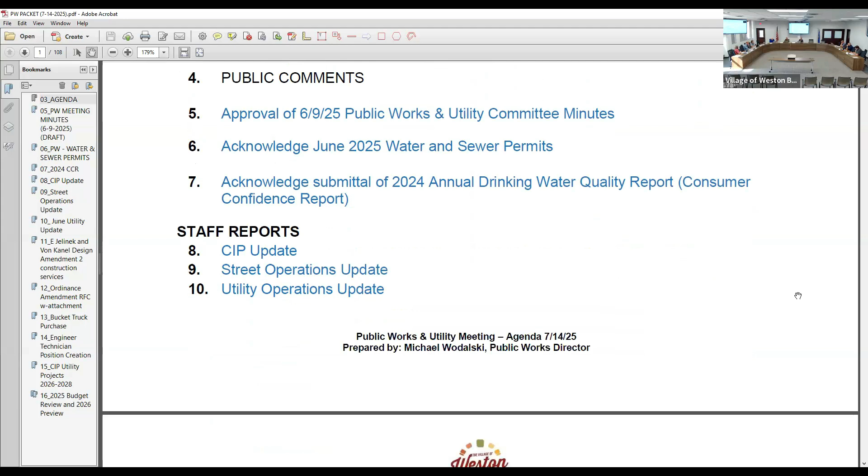Item 5, approval of the 6/9/25 Public Work and Utility Committee meeting minutes. Move to approve. Second. Discussion? All in favor signify by saying aye. Aye. Opposed? I have it, thank you.

Item 6, acknowledge June 2025 water and sewer permits. Move to acknowledge. Second. Discussion? All in favor signify by saying aye. Aye.

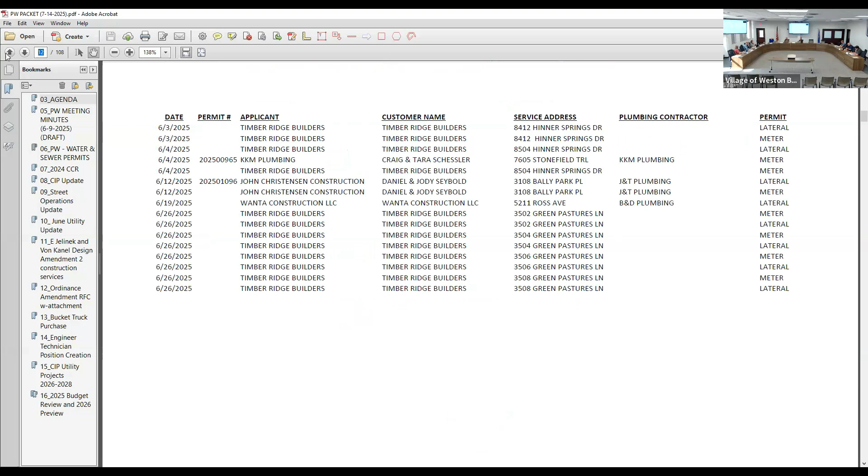Item 7, acknowledge submittal of the 2024 annual drinking water quality report, the consumer confidence report. Move to acknowledge. Second. Discussion? All in favor signify by saying aye. Aye. Opposed? I have it, thank you.

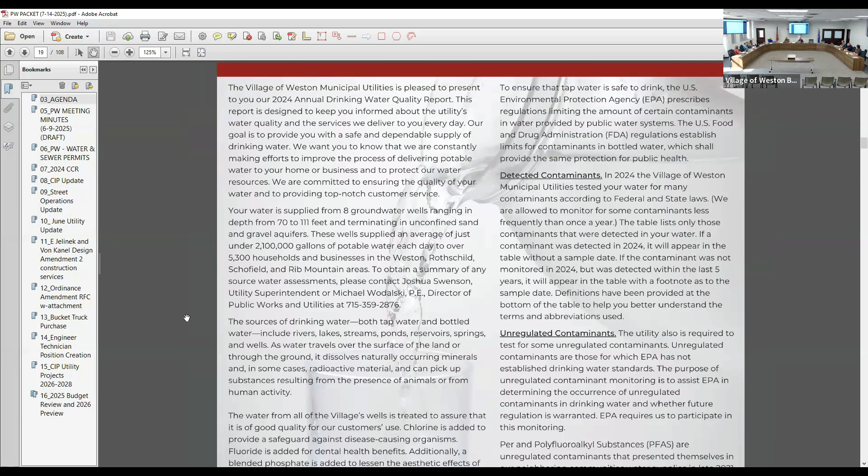Do you want Josh to go through that at all? I looked at it at length and there's a lot of detail there that I really appreciate. For me, the important thing is that anybody who really wants to review our drinking water situation here in the village has enough information to do that.

I've got calls actually asking for explanations on stuff. A lot of it is generated through the DNR, but we add a little spice on our own water report there. Well, that was what I was concerned about — you put enough information out there, it'll start all kinds of conversations. There is that too.

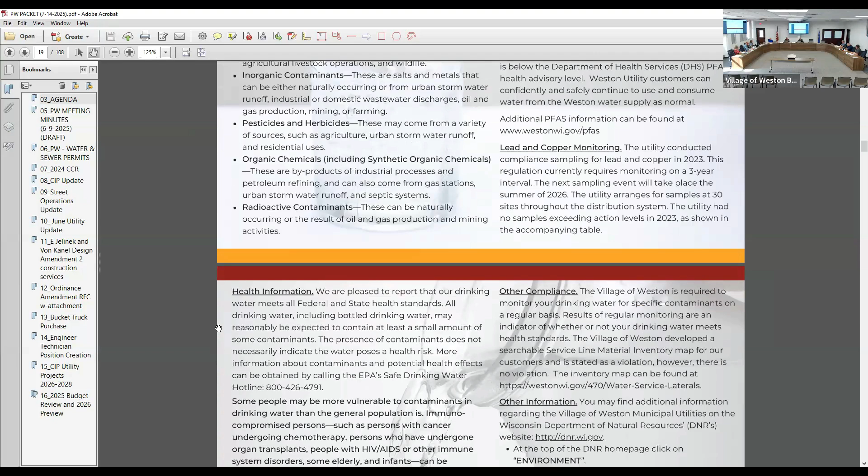We did get our unregulated contaminant monitoring rule 5 results, but didn't get them in time to include in this report, so that could add a little more confusion, but that'll be in next year's report. We tried to give an overview of how they can find more information on what we actually sample and what our results are, so if they want to get into the nitty-gritty, they certainly can.

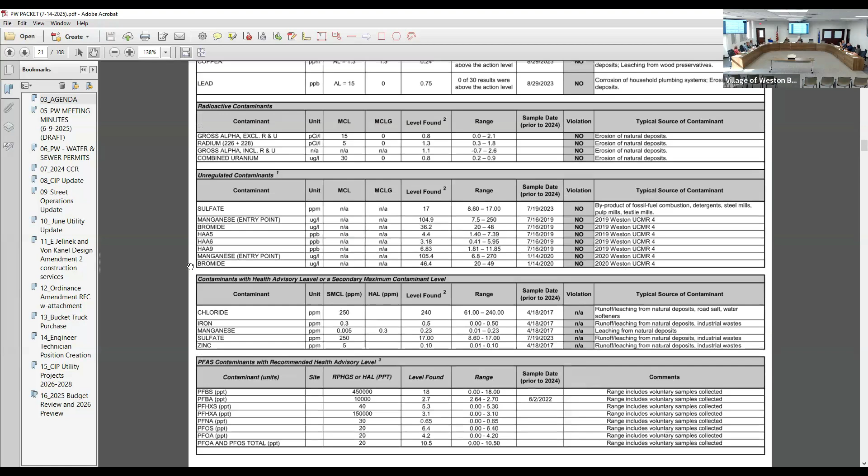Yeah, I guess the only other thing is this was our first report that included wells 7 and 8. Now we have 8 wells in our system — 7 in our main distribution system and 1 over in Cary.

So is the DNR going to review this, or will they put it on the pile for whenever they get around to taking a look at it? We have to check the boxes — the page you're seeing right now is everything we do for compliance sampling, which gets dumped into their database. That's spit out once I put in our meeting dates and where people can find information, but it's really just a cookie cutter generated thing.

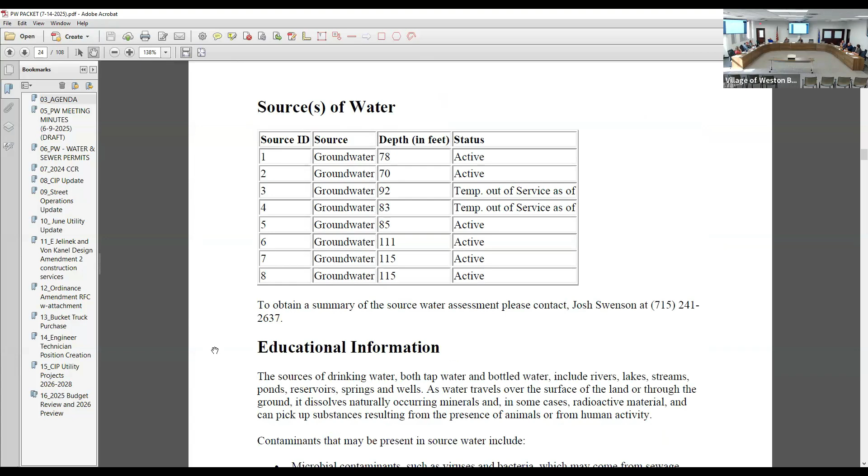Like Rothschild, I think they literally just use this as their annual report, but we put a little extra stuff detailing what's in our system — miles of main and some other things more specific to our system.

I don't necessarily like how it handles the sample date — if there's no sample date listed, it was sampled this year; if there's a sample date in there, it was sampled prior to last year. That's the DNR's way, so that's kind of what we have to work with.

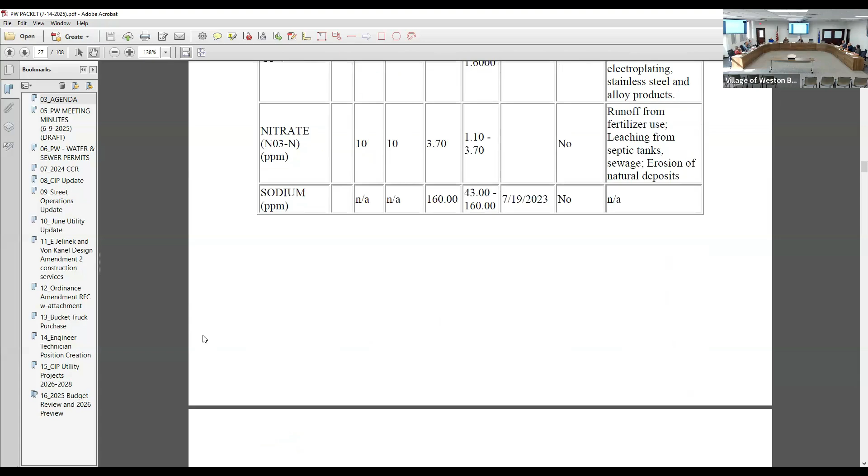The biggest thing, I guess, from the DNR's perspective is the MCL, the maximum contaminant level. As you look through it, our range or level found is less than the contaminant level. So as far as the DNR is concerned, we're under the contaminant level — good job. If we had a bunch of items well above that level, we'd probably start having more interaction with them.

I had just one question. Did they just give you a violation by mistake? Is that what that report was? I've reached out and I was actually meant to bring that up too. So it was turned in, are you talking about the material inventory analysis?

So our service line material database, when we had submitted it, apparently there was a delay in them communicating to us that there were a few that I had labeled as unknown on the customer side for their service. So I had to go in there and change what the material type was, and then it was fine, but it didn't reflect that in there.

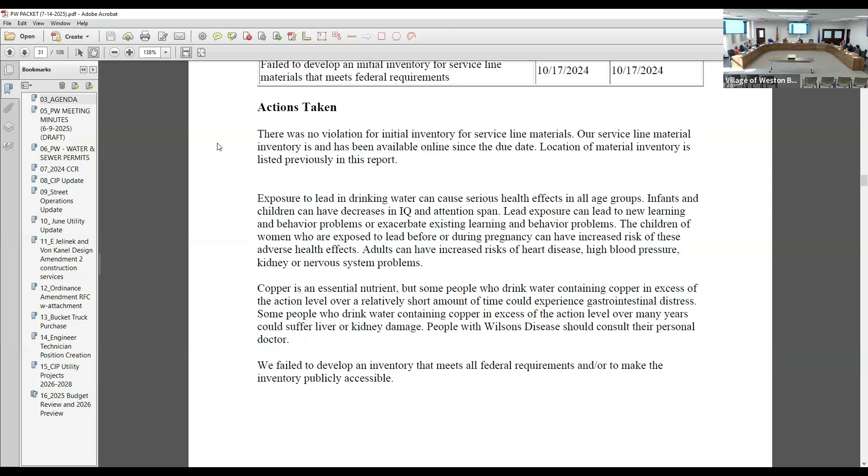So I reached out to make sure that everything is copacetic. I haven't heard back from them yet, but everything is submitted, it's online. I got confirmation that they received and it was approved until I saw that in here when I populated the report, where it showed that there was a violation. So it is online.

The service line inventory is something we've got to work through every year. We probably have to revisit it and make sure what's added, new homes that we add, we've got to add that to our inventory. So I'm sure there are some mistakes in there, we mislabeled a couple things, but it's something we'll have to keep working through.

If we dig up a service and find out it was something different... I mean, we do not have any lead services. That's the biggest impetus of this material service line database, for all the lead service line replacements to be noted, which we have none.

But yeah, just having the violation date and the resolved date as the same day was confusing. I can't remove that out of there, but yes, I was confused by it. I'm like, how do you get that and resolve it the same day?

I worked a lot with DNR in the past, and they just told me flatly, if you think we're gonna give you a clean bill of health when you submit the report, that's not gonna happen. Find something, we're gonna ask for it. So you do a great job and submit it, but still they're gonna come back and... never perfect.

So these reports, what, every 2 years? Every year? So this report is created for last year's sample results and everything that we did in 2024. So you don't redo everything practically, you just review and update it.

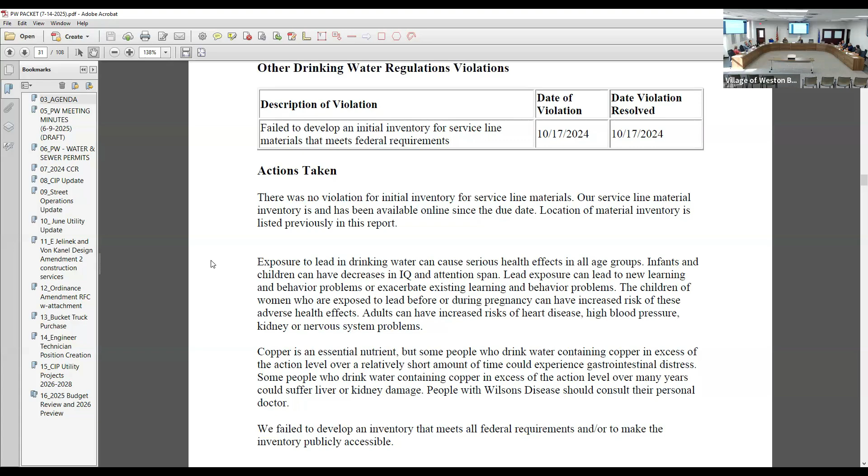Yeah, a lot of the front end stuff we update, like our lane miles, our number of wells, some of the stuff that changes for us as the Village of Weston. But a lot of the information under our inorganics or our disinfection byproducts is kind of cookie cutter, boilerplate material for what we do that year for sampling. It automatically updates in the DNR system and is generated through their online system.

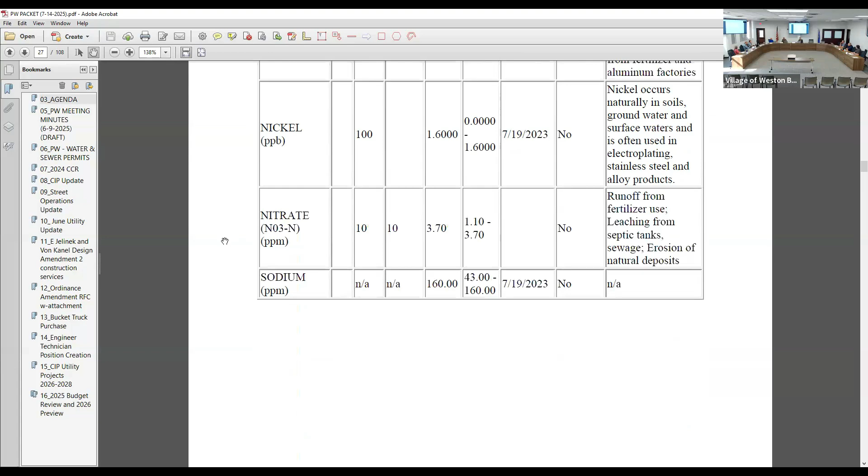Okay. Other question? I'm good. You're good? Okay.

Staff reports, CIP update. Weston Ave is still chugging along. The pipe crew should be back this week. Blasting is finished, so I'll be moving through that and getting the roadway built or rebuilt between Von Kanel and Heeren.

They are encountering, I don't think it's quite peat, but almost like a hidden topsoil layer about 1.5 to 2 feet below where the existing road bed was. So spending some time getting that material out of there and putting back suitable material.

It's not uncommon for us in older parts of the village that never had water and sewer before, as we start digging, to find that back in the day they just maybe dug out some of the ditch, put it in the middle, and covered it with gravel and called it a road. So catching pockets of that, it's not necessarily consistent throughout, but there are pockets slowing down the road building a little bit on that portion.

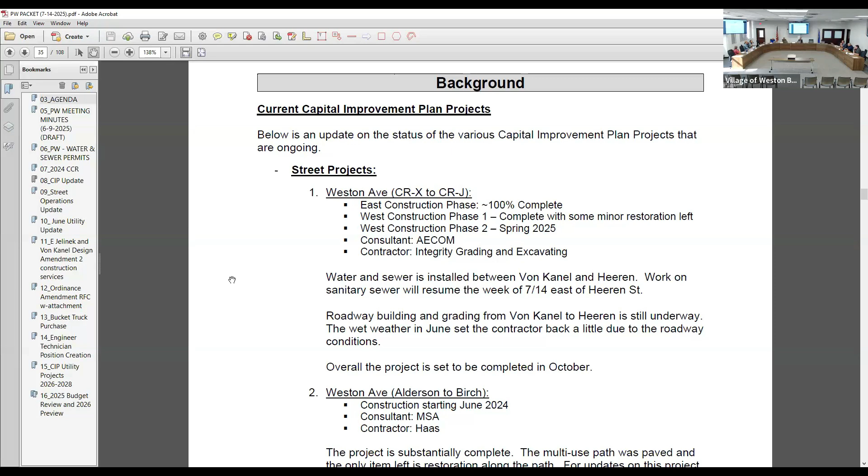The Alderson to Birch part of Weston Ave, the multi-use path was paved. That was 2 weeks ago now.

Excuse me, Michael, what did they do with the blasted material? It's still in the ground, they haven't excavated it out yet. So what's the plan?

If it's usable, for the most part, they're just going to dig it out and put trench backfill back in. With the rock? Well, they'll remove whatever rock is in there and then put new material in.

Yeah, we don't want rock at the top of those pipes. So if they say they blasted the 10-foot trench, anything in that 10-foot column will be coming out. So where he's disposing it, that's what I was getting at. It's up to them to...

Yeah, I mean, if it's something we think we could use and get crushed with our base course in the future, or if it's something that'd be usable for riprap or something, we could keep it. But if it's not something we'd want to use, just like any other spoils on the project, it's up to the contractor to dispose of.

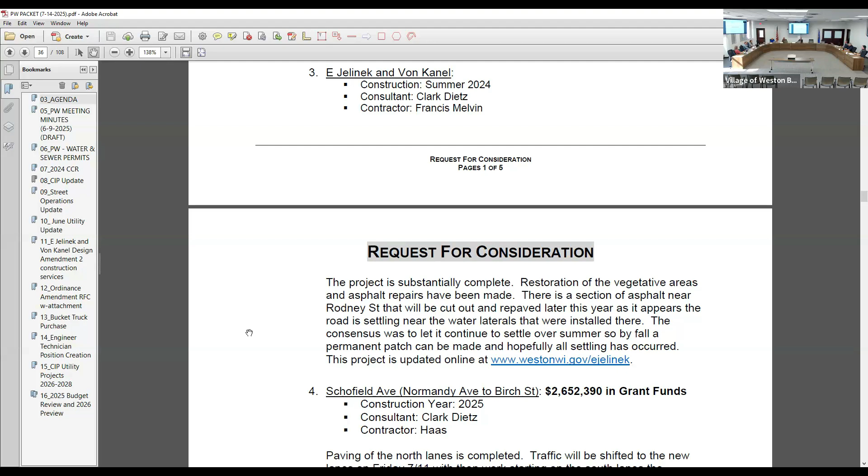I think the last 2 hydrant adjustments were done Friday. I saw them out there taking care of those. And there's maybe 1 or 2 driveways kind of on the punch list to follow up on, but for the most part, again, that one's done.

Schofield Ave, if you've driven through there, we're now driving on the asphalt lanes on the north side, and they start breaking up the concrete on the south side. So kind of a repeat of phase 1 is now happening in this second section.

Fuller Street's the other one that's currently underway. So storm sewer and water main valve and hydrant replacements and adjustments are going on north of Rogan Lane. Today they're at Tricia, tomorrow they'll be at the Morning View intersection. I think they're hopping back to Thomas and then maybe Ross Avenue later in the week. And I think that kind of completes the intersections along that stretch.

And once that utility work is out of the way, they can start building the roadway. While they're doing that with that crew, they have a second crew out at Kellyland Park digging the storm pond. If you've driven by there lately, it's a really big deep hole. And all that sand is currently coming to our Ryan Street site so we can use it on future projects.

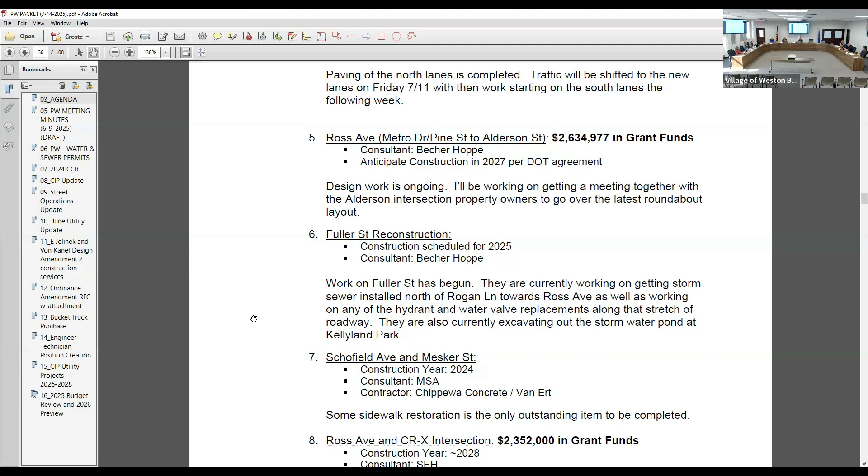And those are the main ones undergoing. We did have kind of a touch base meeting with RC Pavers for the business park and hospital area repaving for this year, making sure they get that work started here in a timely fashion so that it can all get paved before the snow flies this year.

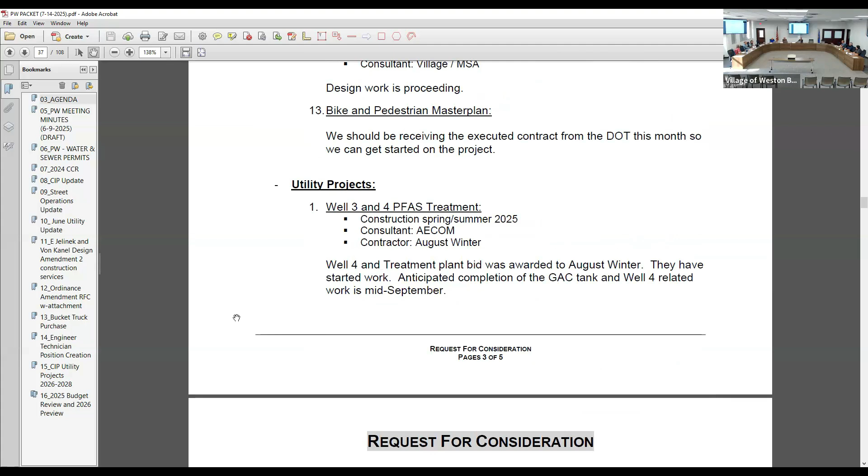We're still getting through design on some of these other projects and coordinating some items with the DOT at the various levels. And then the well 4 project, the GAC tanks now are looking like they'll be delivered the first week of August, and should get that whole area back up and running, hopefully by mid-September, pumping well 4 water back to the system. And then well 3 was submitted for the emerging contaminant safe drinking water loan at the end of June for the next funding cycle.

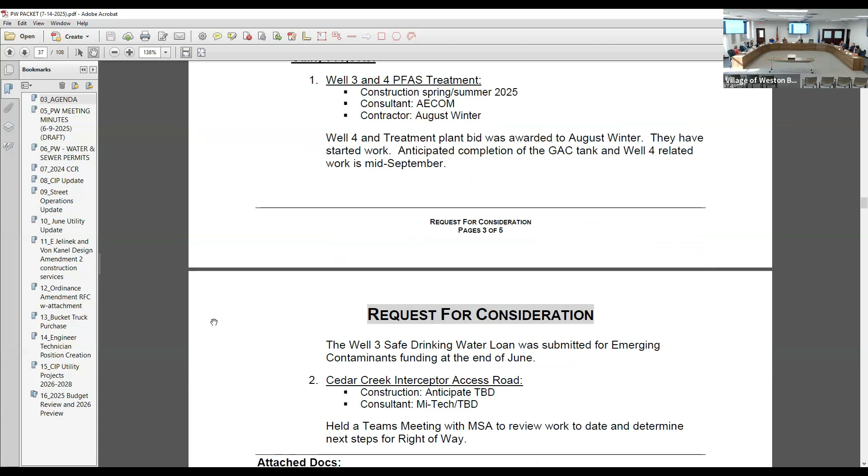And we did have a meeting with MSA to go over the Cedar Creek Interceptor Road. So they're looking at the easement exhibits and kind of evaluating the scope that they should be providing us a contract for.

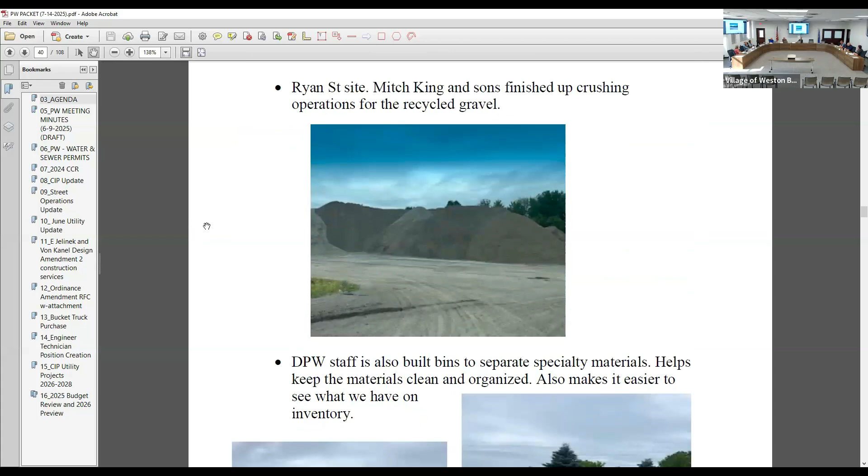Item 9 is street operation update. We've got the rural ditch mowing and the right of way mowing still in progress. The summer help and mechanics helper are helping with those operations. Also, Mitch King and Sons finally finished up crushing in June, and all the recycled gravel is ready to go. At the Ryan Street site, we built material bins that help separate the specialty materials we get, which helps keep it a lot more organized and clean.

Norcon Company did the repairs to the Eau Claire River Bridge in a matter of 2 days, completed Wednesday into Thursday, with minimal traffic impact. The cost was about $9,500.

The area repaired wasn't just the big square shown. There were multiple spots on both lanes, little ones upstream and on the other side as well, but the focus here is on the big patch.

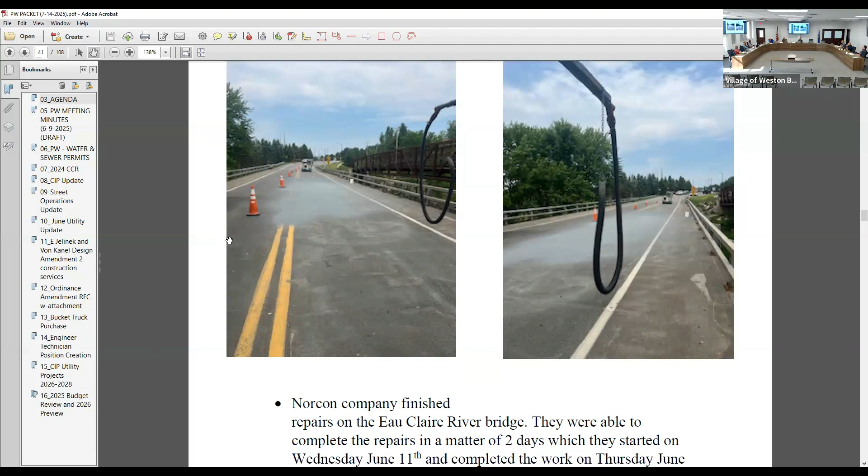Regarding the other bid, Michael, I thought there were three. On that one we just had the one at $9,000, but there was another one higher, I think.

On the topic of the bridge, what is its remaining life? From sound checks it's sounding more hollow each time, so these repairs are likely going to be more frequent. We repaired it 4 years ago, and it's not going to get any better once it starts going. I think the last fix around 2020-2021 was maybe a 10-year fix.

In our budget items, are we starting to look ahead on that bridge? Yeah, that'll be a bridge probably in the 5 to 10-year range. Really hoping there'd be another river crossing at some point, but figuring out how to do that isn't an easy answer.

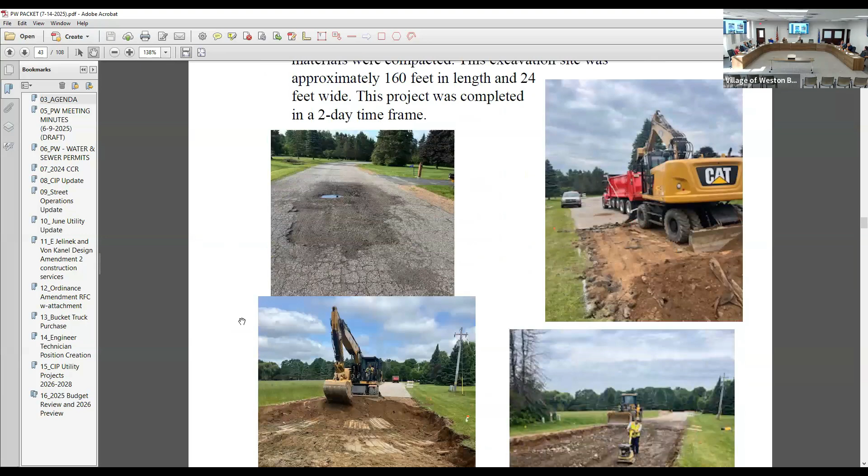On the road construction side, staff excavated one of the bad spots on Bushka Street, performing a 2-foot excavation of material consisting of topsoil and clay, similar to what Michael mentioned earlier on West Neck where the ditches had rolled into the roadway. They dug out to a good bedding, replaced it with a foot of break rock and 12 inches of gravel. All material was compacted back at the site, which was approximately 160 feet in length, 24 feet wide, completed in 2 days.

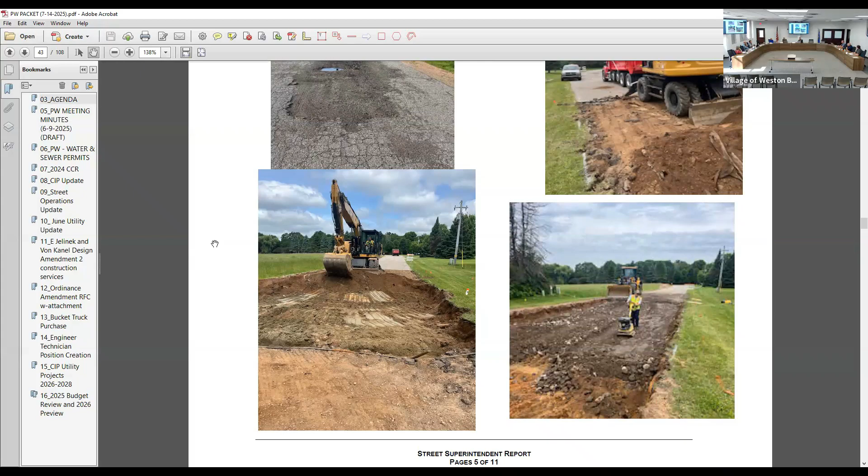Was there a base course in there? Minimal - it was granite as the base, since the whole subdivision was built like that. That's why the road doesn't hold up; we're going to have to keep doing more sections, probably yearly, to get that road built to a proper standard.

We also did the concrete work on Alderson, 6409, where a water main break had taken place over the winter.

Crew poured back the sidewalk, driveway, apron, and curb line, also did the topsoil and restoration of blacktop. Between the 2 sites along Alderson Street, there occurred over 60 feet of curb, 25 feet of sidewalk, and 10 feet of driveway apron concrete, totaling just under 6 yards.

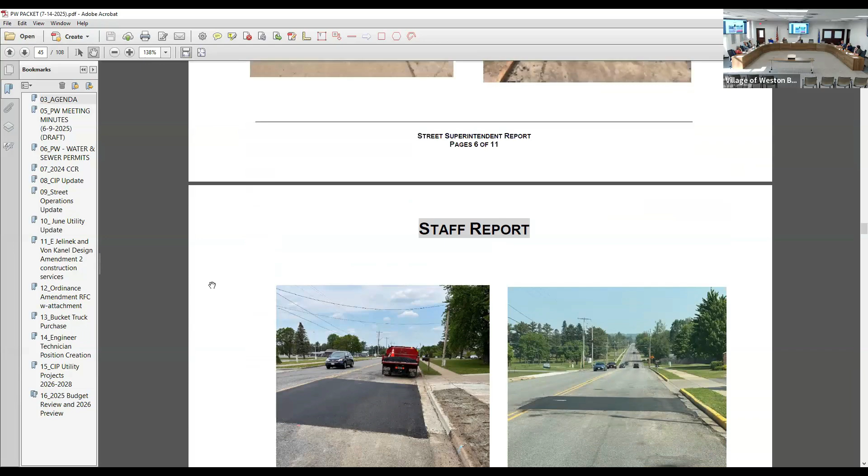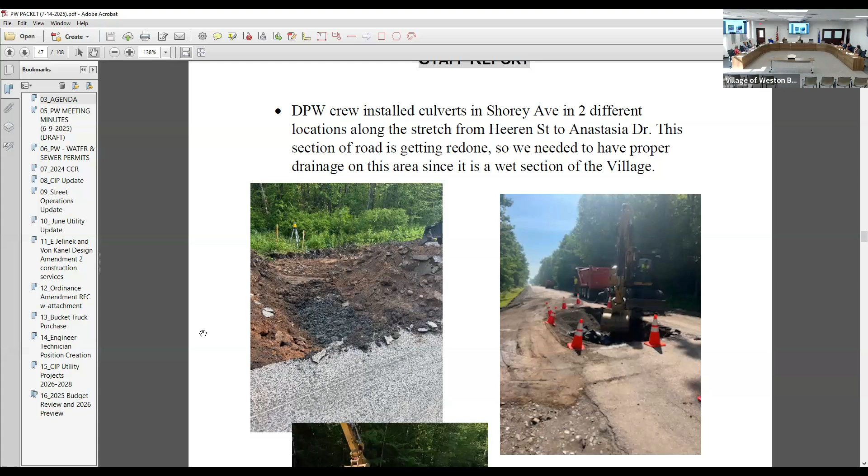The crew installed the culverts on Shorey between Anastasia and Heeren, but that road is getting pulverized and repaved along the Shorey Ave project, so we had to get proper drainage in that area, then add gravel. Once they pulverize that road, we'll be adding another 3 inches of gravel on top of that. The staff has also been working with Haas Construction on Schofield Avenue, doing the topsoiling and hydro seeding.

That work was along between the curb and the sidewalk from Normandy to Burr Street. A crew of 5 did all that, and they were done in a matter of 2 days, just kind of took them to do it. So they did an excellent job on that.

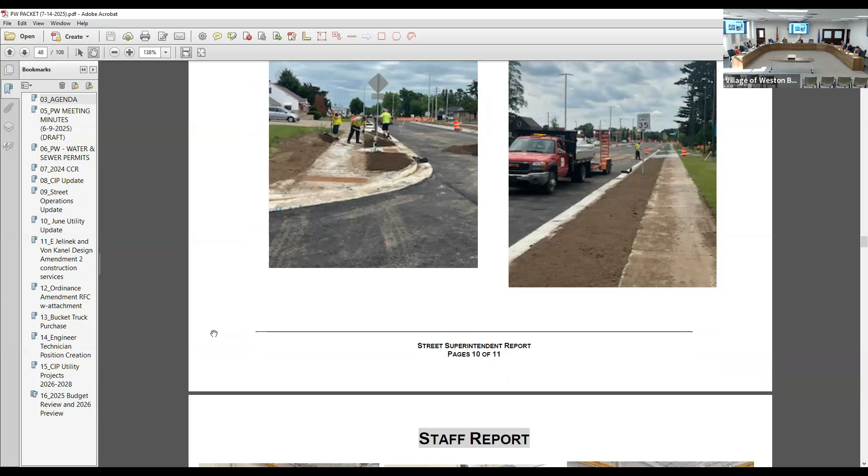In the shop, unit 55, the shop truck, needed service, and they added a lift gate to it, which the foreman found a good used one in working condition online, and installed it in house. The tracked excavator was in for full service.

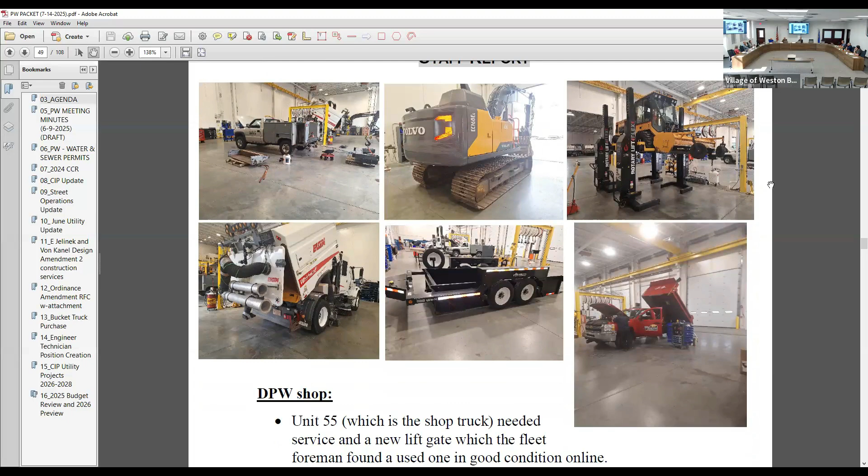Number 113, the Lizard, as we call it, the mowing tractor, was in for full service, but it also had a transmission rebuild since the transmission went out on it. Unit 81, the street sweeper, was in for maintenance and worn parts.

The new trailer was brought in and wired for our trucks. Number 8, the 2012 1-ton, got an aftermarket backup camera installed for extra safety, making it a lot easier to hook up trailers to it. All the work and installations are done by the mechanics on staff.

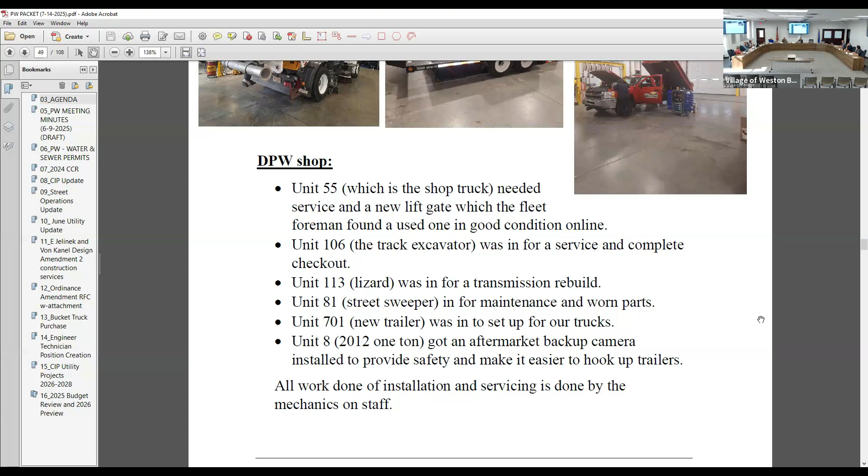Anything else? That'd be it. Question for Forrest? Okay.

Utility operation update.

Had some miscellaneous well maintenance items with some chemical feed repairs, just the usual small leak type stuff. We continued with a number of lateral inspections, photo included. We did have some damage to one of our wells. I included a photo of some fencing that we repaired ourselves.

Our water main flushing did begin last week Monday. We have a little different setup this year. We used to always start over by well 1, working it down that way. We kind of have an isolated system here down Camp Phillips where we're flushing from well 7 and 8. The guys have got all the way down from 7 and 8 down to the Everest Tower.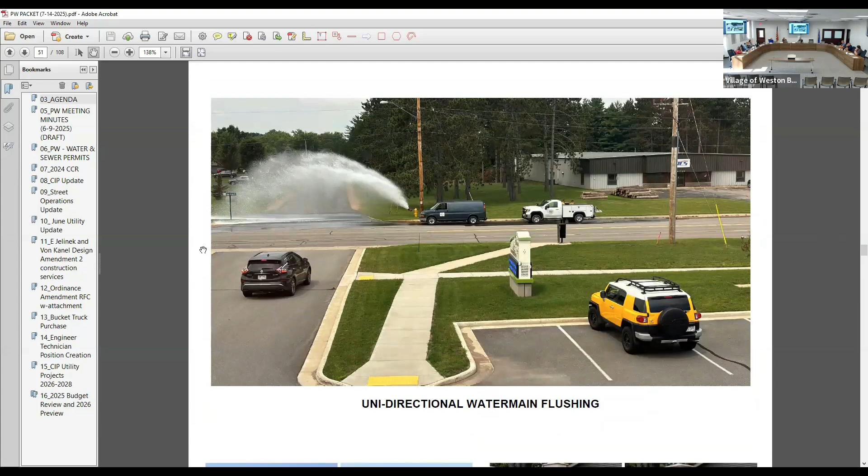They're working through, they got through kind of our Crestwood Acres subdivision already. They're working over kind of to the east of our Weston Elementary School, working towards, I think next up was like Sternberg Timber area. They'll be flushing onto Ross, continuing all the way to the east of the system, and then they'll come back and utilize the cleaned, flushed areas to continue flushing the clean water out to the west end of our system.

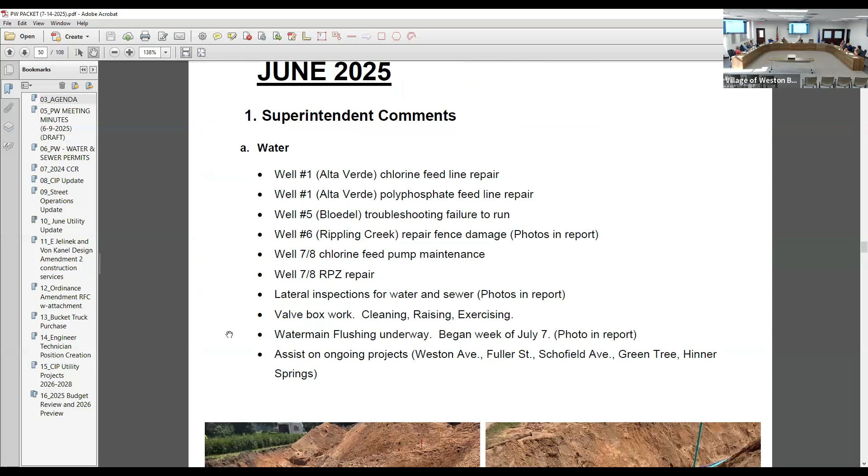We've been quite busy as well on some of our street projects. Fuller's been pretty much shut off daily for different intersection work where we had to have some valve repairs and replacements and some hydrant addition. We've kind of reconfigured some of our valve orientations along Fuller for better flushing operations and a little more ease of shutoffs when we need to have them shut off.

On the sewer side of stuff, we're also on top of our flushing. We've got our sewer jetting continuing, so our flushing and sewer jetting basically takes 4 of our guys, and that's what they basically do all day. So it's tough getting some other stuff in. We do have summer help on staff.

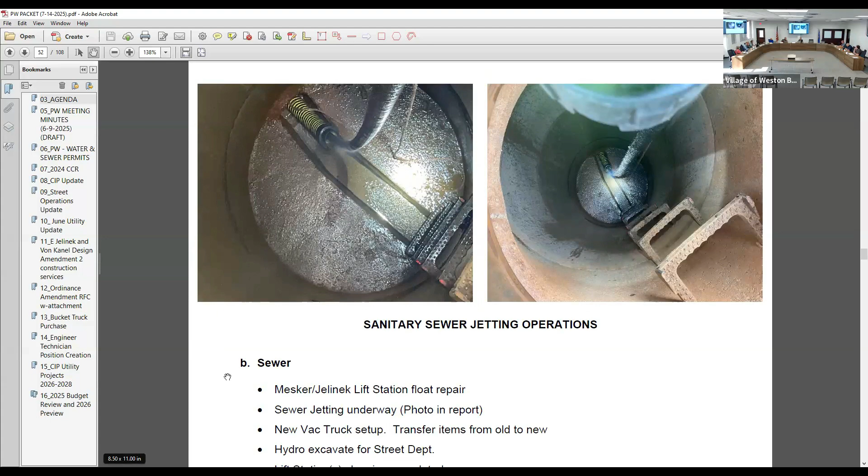We're also continuing some work on our new vac trucks, setting up some items. We did continue to clean our bad spots and collect our pH probe data. We do have a number of additional probes now, but we haven't been able to deploy everywhere we want. It's been tough to find time to get everything done right now, but we'll get to it. Hopefully come fall, we'll free up some time to get some of our pH probes out into the system.

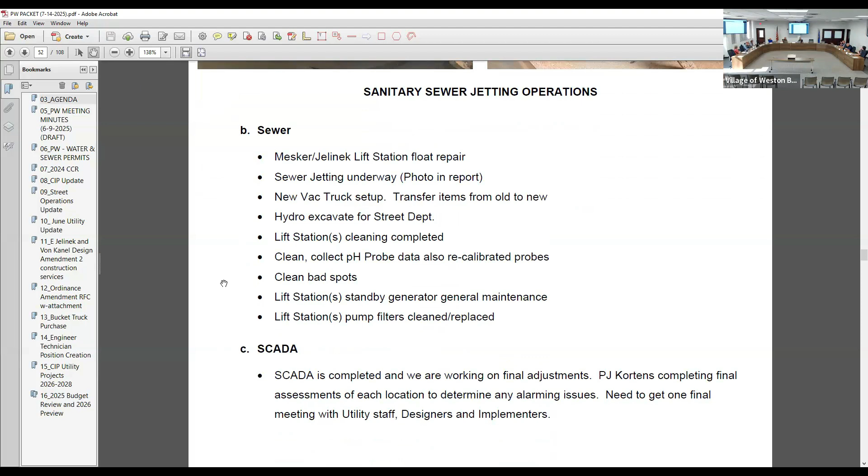We had some general lift station and generator maintenance, some other general lift station filters cleaned and replaced. Our SCADA project has been on this for quite a while. I believe we have one more final meeting. Kind of the hang up is trying to get the designer in the area and also coordinate with our engineers to work.

I believe maybe we're looking more mid-August to probably have our final sit-down assessment of what was designed, what was implemented, to make sure everything's functioning as we wanted it to. I know there was a hiccup, he's got to fly in from Connecticut to meet with us, so we're trying to get a day that works for everybody.

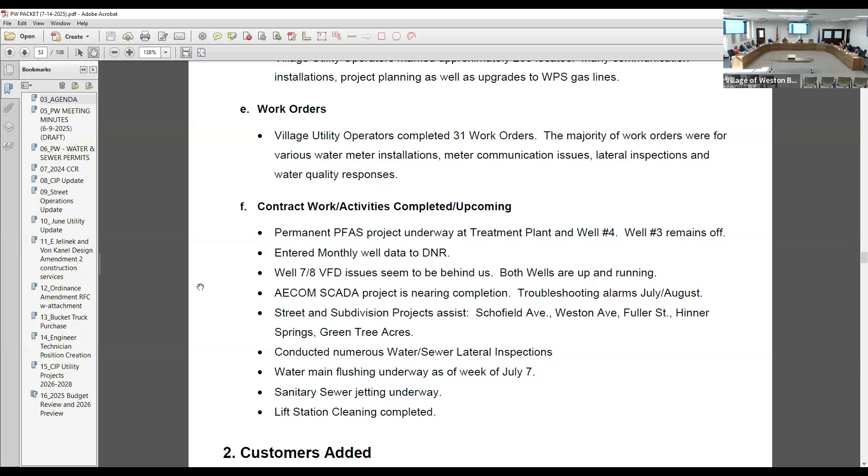The rest of it, utility locates coming in, a lot of locates, a lot of work orders still going on. Michael touched on our PFAS projects. We continue to enter our well data for the DNR. Knock on wood, our 7 and 8 VFD issues seem to be behind us, both wells are running well.

You can see that some of the complaints have gone down, we used to get a number of them. Maybe a certain small area might have some issues yet, but hopefully once we get through with this side of the flushing of our system, we can get that side more 7 and 8 and dial back on 1 and 5 over there. Touched on our street stuff. I guess that's really all I have, other than our customers added and the general data with our water pump, lift station hours, and wastewater flows.

I guess we did lose a utility operator. David Treba decided to move on to another job, so we're back to 4 full-time operators and a summer help who's been sick the last 2 weeks.

So can you replace them? Yeah, the job is currently posted, so if you know anybody who would want to be a utility operator, tell them to go look at it. When you have 5 full-time people and you lose one, that's 20% of your staff.

Especially in the summertime, that's a busy time of year. Basically 4 guys are always dedicated, 2 to flushing, 2 to sewer jetting. So if anything pops up, it's hard to continue with some of the long-term projects or long-term maintenance items we have.

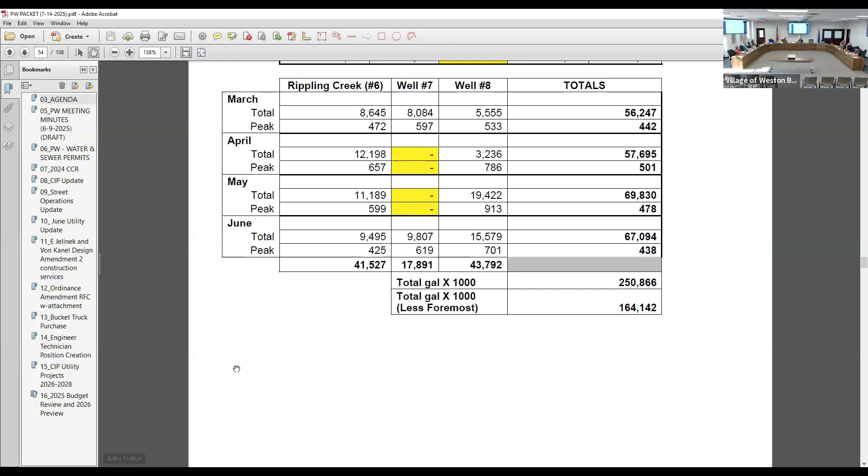And in that same respect, we are also down one person on the street crew right now too, so that's 1/8 versus 1/5, but still. We have a couple interviews lined up for later this week for that position.

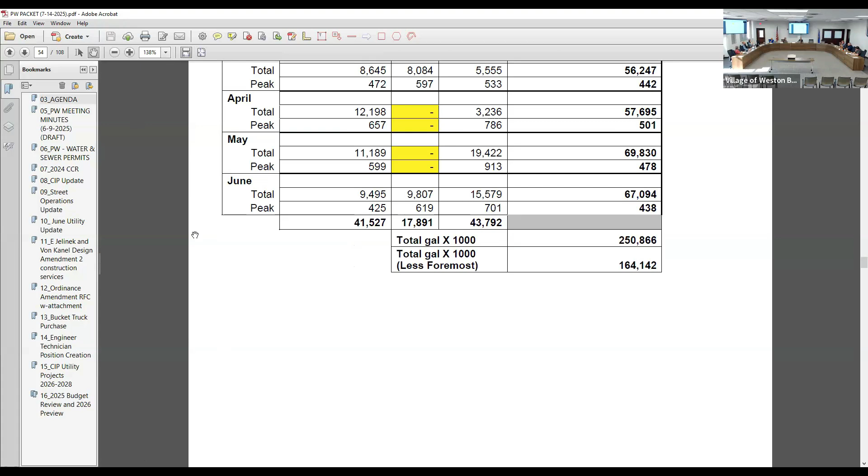Anytime you lose anybody, the work that individual was doing is on hold, that's all. You still try to, I think we've learned a couple things, to not put people's feet to the fire, but when there's things you need to check off on your to-do list, I think we need to hold them to it and put some deadlines in place to make sure they're doing what they've got to do and they're here for the long haul.

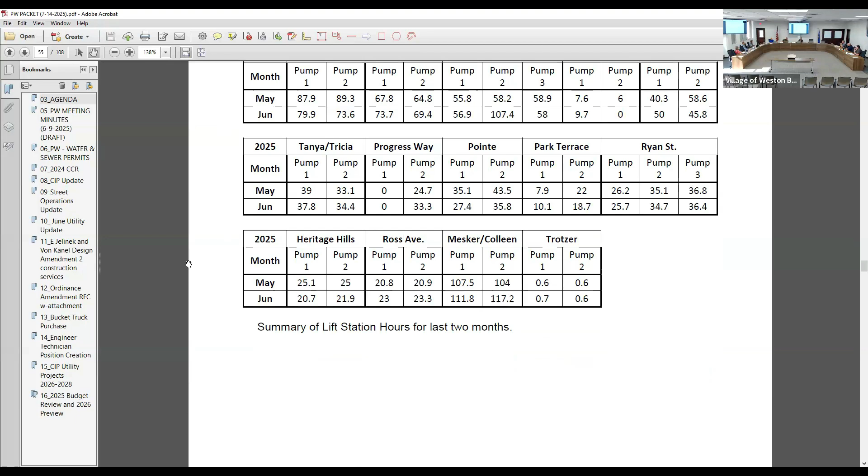When is the PFAS on well four supposed to be completed? Tank deliveries kind of August now, they should have it up and running hopefully September. Kind of mid-September is kind of start up, with completion by, I think, the second week of October, that's their contract date.

Hopefully we get a confirmation of tank deliveries sooner, not just a future date, because we've had April, then May, then July, then August. Hopefully once we get confirmation they're there, because I think they need to be outside for a week since there's some painting and preparation they have to do on site before they can move them into the facility. If we get too late in the year, then we get moisture issues in the air and different things that affect whether the paint adheres to the tank, so we better be getting them in August.

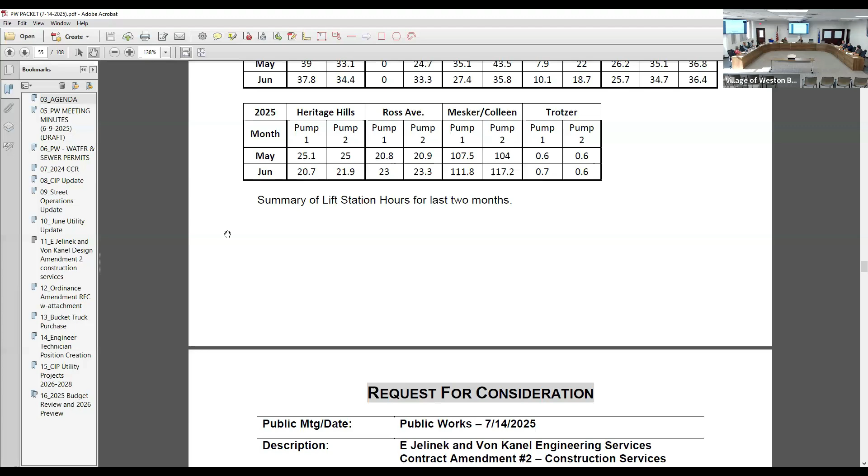Then what is the plan once it goes into effect? Is that just drawdown from other parts of the system? No, it's basically going to be back up and running how it was with our temporary system. We had a temporary PFAS treatment system where we were only able to pump it at 450.

So these tanks, once well 3 is back online as well, they'll both be able to pump through this PFAS treatment into our clear well, then our booster pumps can still pump it at, I don't know, what do we hit, 1,300? 1,200, yeah, like 1,200 gallons per minute.

It's on the horizon where we can have 7 and 8 pumping, we can have 3 and 4 pumping with PFAS-free, iron manganese limited water, where then we can really isolate that 1 and 5 over there to hopefully get the best water quality we've had in quite a long time. Yeah, so 1 and 5 would essentially become, I wouldn't say offline, but maybe just used for an hour at night just to keep them active.

But we'll get into that on item 16, 15, something like that later. Okay, question? Chuck?

Thank you. Okay, item 11, Jelinek Construction Service Contract Amendment. So when we initially sought proposals for the design and engineering inspection for the East Jelinek project, the RFP that all the consulting firms used to provide their costs was based on an estimated 22 weeks of construction. In reality, it took about 32 weeks for construction, plus the as-built drawings, meetings, those items.

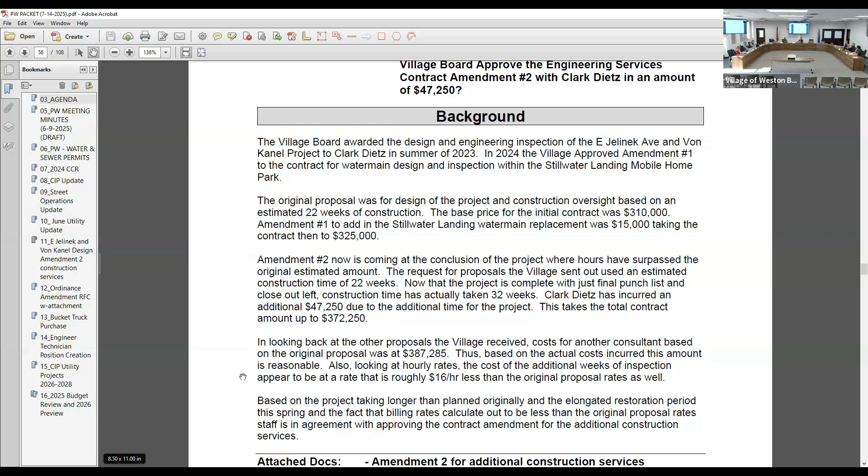So the actual cost incurred by Clark Dietz is an increase of $47,250. If I compare that back to how their initial contract shakes out, it actually appears to be a lower billing rate than what they had based their initial proposal on. So there was additional time on the project, and it seemed to be very reasonable to me to cover their actual inspection hours on that project.

Question on that? Overall, you felt it was reasonable? Yeah. I mean, do they give you a weekly report or something during the construction?

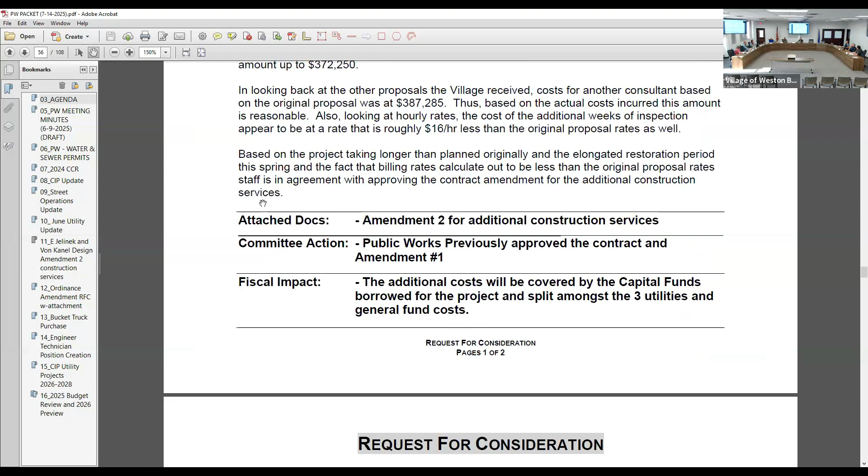Yeah, and I don't know, maybe there's a better way for me to handle this moving forward. It's generally one of those things, and in the past, all of a sudden we have construction services change order 5, 6, 7 because we think, okay, the project's gonna be done in a week, or in the next month, so we get one approved, say in September to get us through October, but then the project dragged on, so now they spend more hours.

And maybe it's just me that needs to say, hey, just so you know, we are running over on some hours here, but we're making sure it's being captured. It's not just, at the end of the day, we didn't meet our profit margin, so I need more money. I think they should give a change order request right away before they go with it.

Okay, it doesn't have to be processed, sure, but it has to be as a record. So at the end of the project, you may have 4 of them, add them up and then say, okay, here it is.

Sure. Okay, if you don't get that, so you rely on him, and what he's gonna do, he's gonna look at his daily log, yep, and come up with the number, and that's what he has done with $47,000. Yeah, so I do have the monthly invoices from them for hours incurred. So it is backed up by real time spent, not an end of project, all of a sudden, oh, we need to make up for something.

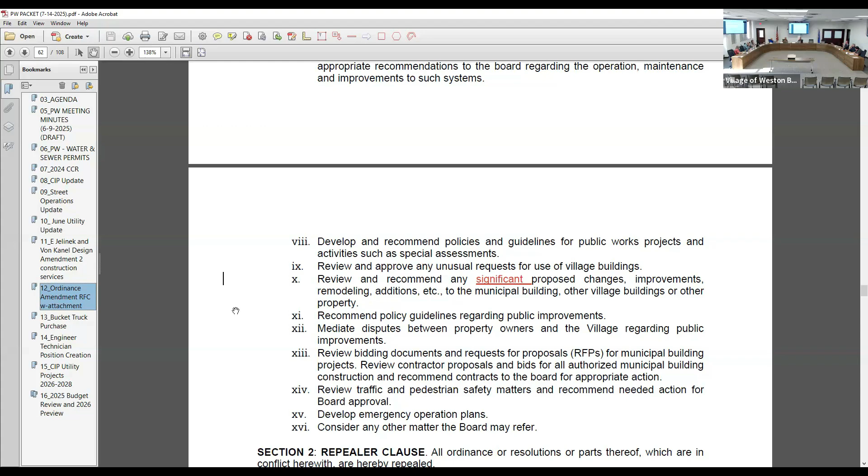I really don't have anything else to add. I'll move to recommend approval of the ordinance amendment to section 214 of chapter 2, administration, to the board of trustees as presented. Second, I'll second. Discussion? All in favor, signify by saying aye. Aye. Aye. Opposed? I have it, thank you.

Bucket truck purchase. All right.

So the capital equipment budget this year had an allocation of 400,000 for public works equipment. We've used that to purchase a grader, the hydraulic hammer, and the trailer last month. Additionally, we had 150,000 for a replacement tandem axle plow truck chassis. We haven't ordered a chassis yet or sought quotes yet for that. So looking forward, even if we were to order a chassis today, we wouldn't be getting one until 2026.

One item that has come up is our current bucket truck is getting to an age where it's maybe not as reliable or as safe as it should be. So staff is always looking at ways to update or upgrade equipment to make their job more efficient, more productive.

So if you're looking to allocate the remaining 2025 equipment fund, as well as a portion of that $150,000 for the plow truck chassis, to upgrade the existing 2001 bucket truck, I'd be looking to find one that's either a demo unit or something that's on the dealership's lot already, if possible. So it'd cover the truck and the bucket lift itself.

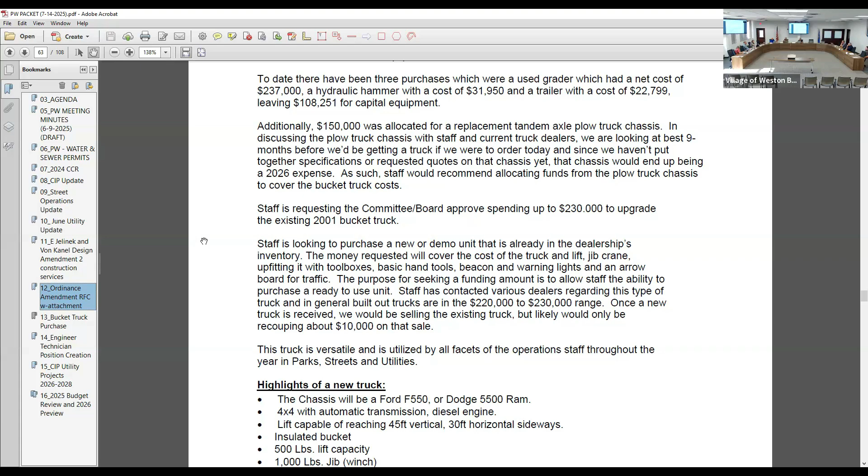In talking to some of those truck dealers out there, that $220,000 to $230,000 range seems to be where most of them are coming in. We would look at selling our existing truck. Again, looking at recent auctions, we're probably looking at recouping maybe about $10,000 on that sale, so.

Really? Yeah, why so little? I think it's the fact that these trucks need to be inspected every year due to the aerial lift, and repairs to that aren't cheap, and even certification isn't free. So there is an ongoing cost to maintaining it, and training guys, and it's not cheap.

Yeah, we gotta crane it. I think if they just sell it for the steel it's more than... it might be, if you find the right person willing to buy it. I think, Brian, it highlights the existing truck in here somewhere too. It's got 119,000 miles, and based on the hour usage, he equates that to 746,000 miles. So in the last 12 months we've put some effort into keeping it running and making sure it is a safe vehicle, but...

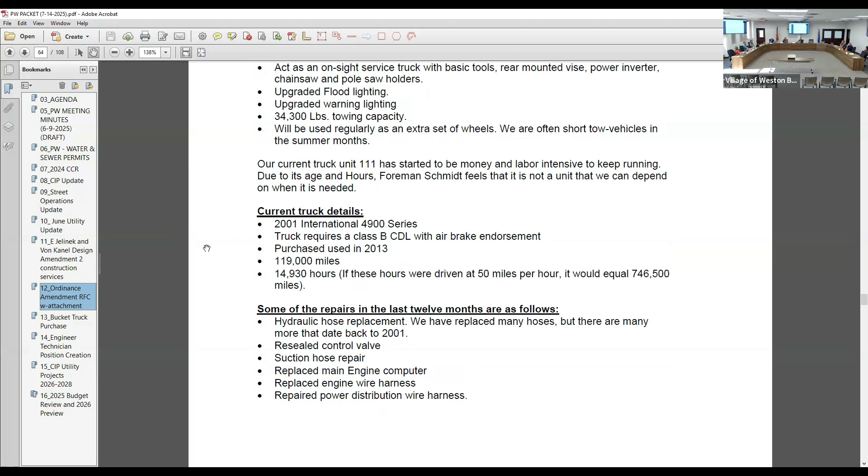Again, our biggest thing is when we have equipment, we want to make sure that, A, it's safe, and B, it's available when we need it. If a storm blows through and there's limbs or things like that we need to help cut, we'd prefer to be able to get out there and do it right away versus hiring a contractor. We've been in that situation before, paying a contractor to do the work we could have done, at a rate that's higher than ours, so.

So a lot of that is just making sure we have a piece of equipment that is reliable, and in this case, safe. Since you're up in the air working, you want to make sure you're not suddenly running into a hydraulic issue or something else where you're stranded up there.

What is the capacity of that crane on that truck? Of the existing one, or what we'd be looking to get? Either way. This one has a 1,000 pound capacity. In the winch, 500 — it says a 500 pound lift capacity, 1,000 pound jib. So you may be under the exception then for having a crane listed. Probably, yeah, I think that's it, it starts at 1,000. That's probably why it is 1,000. Yeah, it's like usually on an accident.

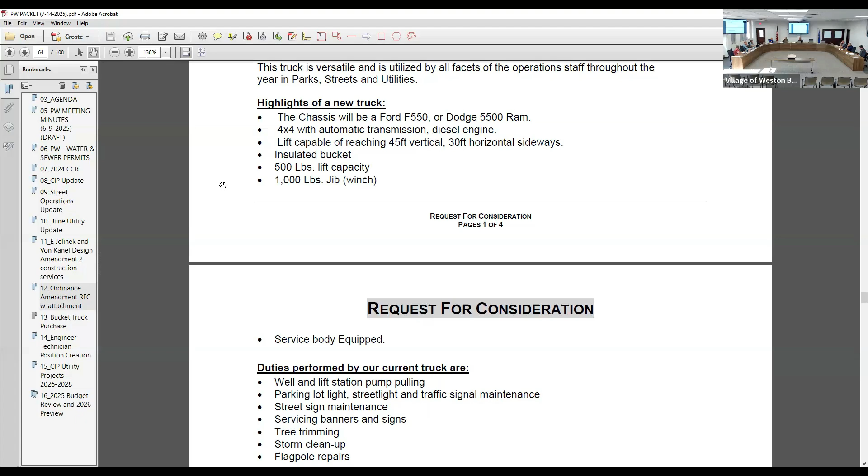Sure. Okay, what's your wishes? So the plow truck chassis that you haven't ordered yet, do you have something that you're currently using? Yeah, so the current truck, I think it's a 2012. So that'll get you into next year. Yeah, it'll get us into next year.

Right, and we do have one on order. I think we only paid the invoice last week, so it's at the truck builder now. That was one of the other replacement trucks we ordered. I don't know, maybe it was last June, so it took a while to get here.

Okay, yeah, well, it makes sense to me to prioritize switching the piece of equipment out that's giving you the most amount of problems right now.

So I move to recommend the village board approve staff spending up to $230,000 for a replacement bucket truck. Second. Before I second that, does that include sales tax or don't you have to pay that? We don't pay sales tax. Okay, second.

Discussion. All in favor, signify by saying aye. Aye. Opposed? Ayes have it. Item 14.

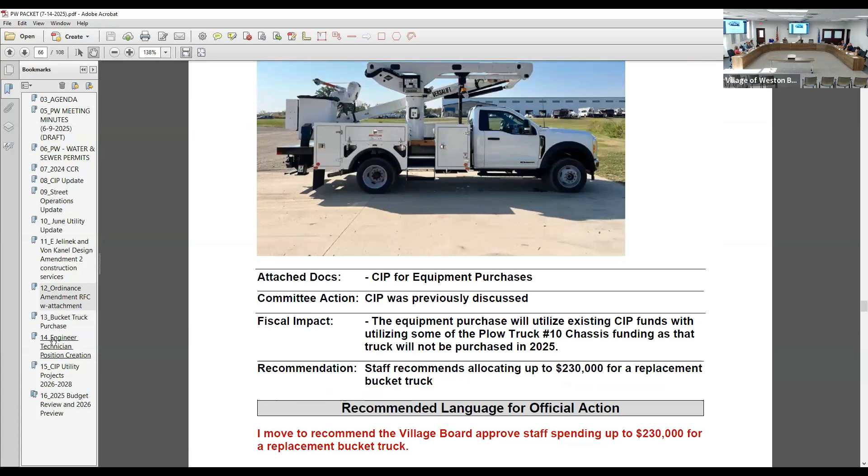Revised job description for utility technician position to engineering tech. So, between our operations staff being down a person, our utility technician, who handled a lot of our mapping features and other permitting and some of our internal programs, also left us in the month of May. Will had been with us for about 8 years, but his life journey was taking him back down south to the southern part of the state.

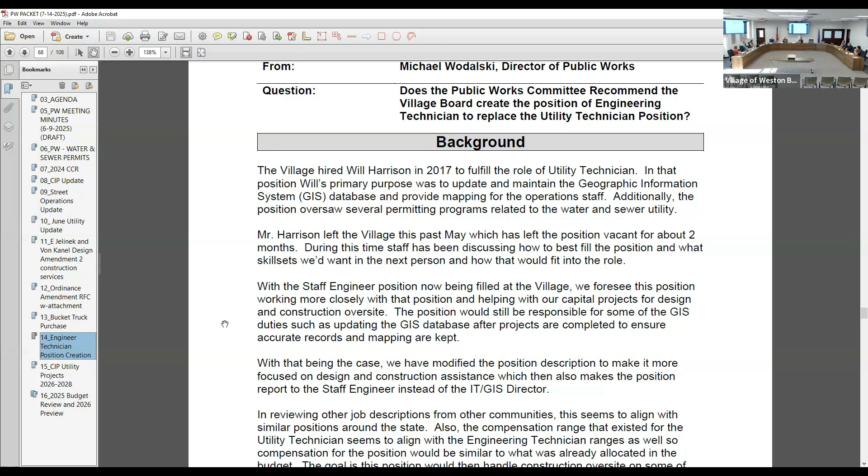So we're looking at, as that vacancy occurred, what fits best in the organization moving forward. We had a big need for updating our maps when Will was hired, and we made leaps and bounds on that. A lot of times our utility guys go places and we're kind of the envy that we've got maps on our phones. Our Digger's Hotline tickets get automatically email-transferred to us. We've made a lot of big strides in that section, so we don't maybe need a position that's as GIS-heavy as that position was.

And with having Ike on board designing some of our projects in-house now, we really need somebody we can put out on a construction project to do the inspection and help with some of the drafting, working with the surveyors to lay out the design of the project, specifications writing, contract administration. So we're trying to retool this a little bit from a utility GIS-focused position to more of an engineering tech, on-site construction observation type position.

So we looked at what other municipalities have out there for job descriptions, and the pay range seemed to be very similar to what we were paying the utility position, so it'd be equal on the pay scale. What is that pay grade? J, shoot, I didn't see it, I'm looking.

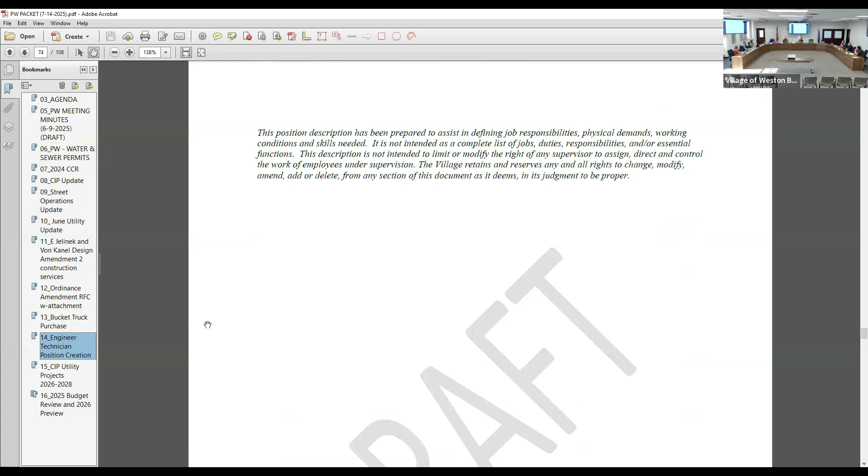Did I include the matrix? No, I did not, I forgot to include that page. Search for it, I didn't see it. I don't know, I want to say it's close to maybe $30 an hour for the median. 30? So what, 65,000 a year? Yeah, is that right?

Yeah, so the minimum would be 28.43 an hour, which would be 59,000, and the midpoint would be 32.50, which would be 67. So we would anticipate someone would be in between the minimum and the midpoint. How many years experience?

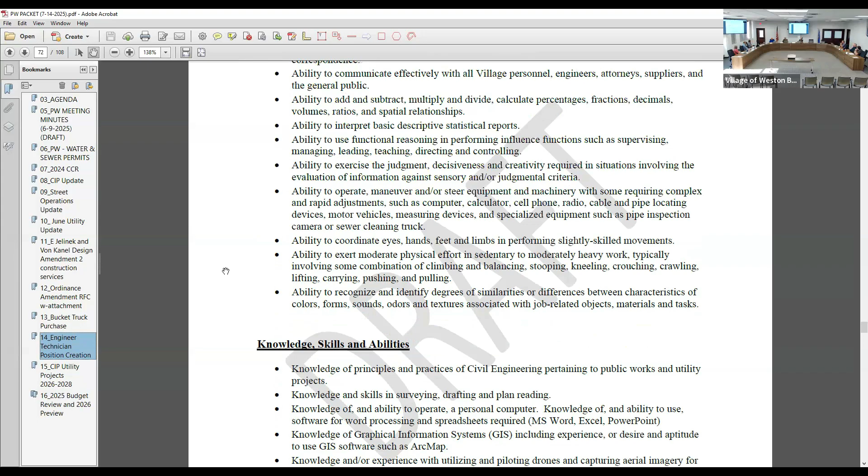We would put it out there and see who applies. Well, because what you're telling me, you need somebody with experience. The guy out of college or out of technical school couldn't do all that. Well, you couldn't do all of it either, and I guess that's the hard part with a job description. That's why we have the range.

So if we get somebody fresh out of school, they start at the bottom, and the four of us here are out on site with them on day one, training them. If it's somebody with 15 years experience, they maybe even start above the midpoint. Even 5 years experience, I'd still be happier than just a brand new hire. So that's why we put a range out there.

You never know who your applicants are, so you can try to be really picky and find that person with 10-plus years experience and maybe not get that application. Or you hope you could get that, but if you put it down at the bottom end, maybe somebody looks at it and thinks, well, I'm not going to apply, they're not paying enough for my time.

So, okay, this would go to the HR committee, village board for approval since it is a new position, and then we'd start advertising for this one as well.

So then do we have budget for it? Yeah, like I said, we had the utility technician position, so we won't fill that role, we'll instead have somebody in this role.

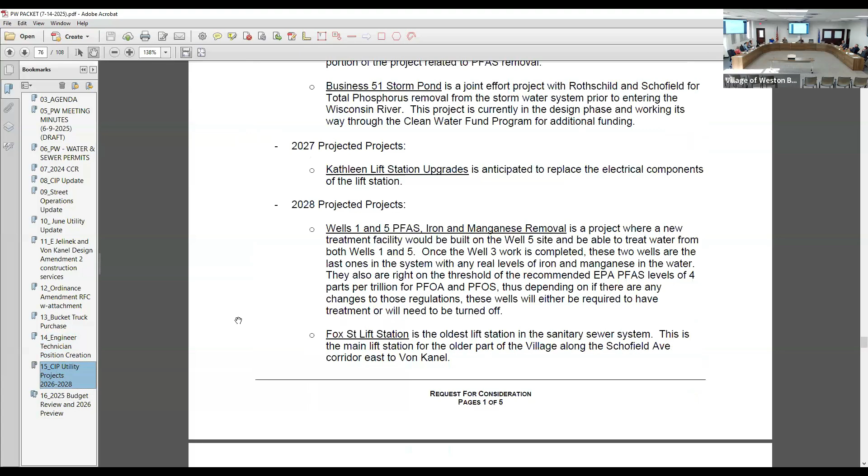As I said, we'd come back to it. So wells 1 and 5 are kind of the last major well project we had identified previously. We'd be looking at building a new treatment facility on the Bladel Ave site and pumping water from well 1 over there, so both wells would be treated at one place. We'd be looking at starting that project once the well 3 work is completed.

Those 2 wells are right on the threshold of the recommended EPA PFAS level of 4 parts per trillion for PFOA or PFOS. So if there's any changes to those EPA rules, we may need to act sooner or turn the wells off, or we'd issue public notice saying we're running water that violates an EPA standard. I don't think we'd want to do that, so we'd be looking at minimizing use. The most recent data I saw is those EPA rulings maybe got pushed back a couple years with the newest administration, but long story short, we're going to try to minimize the use of water from those 2 wells moving forward as much as we can until we're able to get that treatment facility built over on the well 5 site.

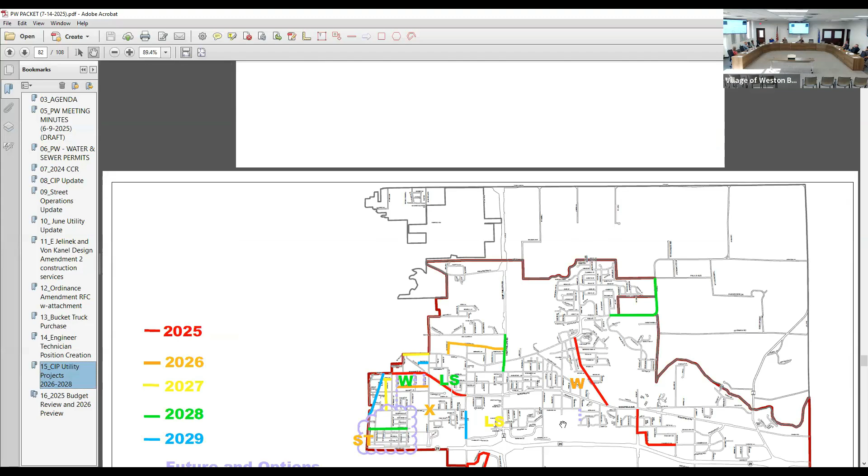When is that the schedule for? We want to make sure well 3 is done first. Hopefully, I have it in there as a 2028 projected start time. But to start construction or start design?

Probably construction. We can start design sooner, and even with the Bladel Avenue project, we're designing in a raw water line so that the Alta Verde well will pump over to Bladel right away, so we can make sure we're not having to redo roads or anything else like that. That's where having that long-term plan is helpful. So as you tackle the intermediate projects, we can make sure we're putting ourselves in a position to succeed long-term and not all of a sudden have to redo a project we just did.

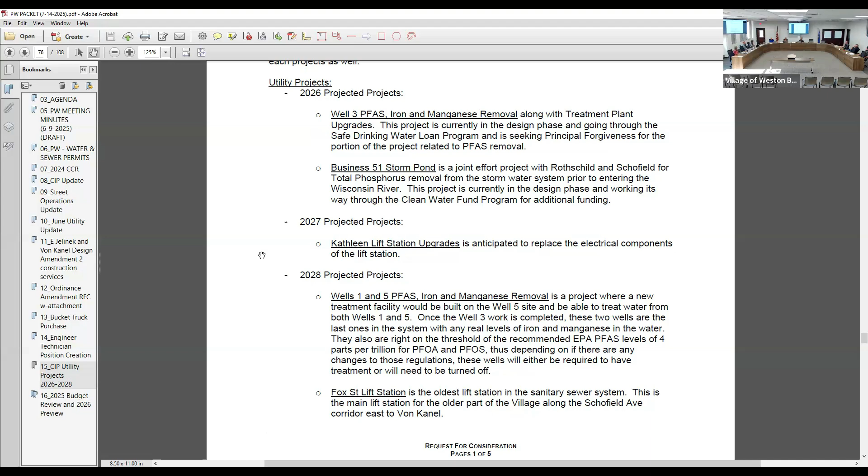So that one's there, and like Josh and Roy were talking about earlier, we'll have the capacity to provide water to the rest of the system without wells 1 and 5. So if we need to use them for a couple hundred gallons or a thousand gallons a day, just to keep them active and running, we will, but otherwise we won't rely on them to be major contributors to the system.

And then the Fox Street lift station is kind of the oldest lift station in our system. It's tucked on Schofield Ave and Fox Street right in front of Pick and Save there. I thought the pumps were replaced. The pumps were replaced, but it's got a really small wet well, and all the other electrical is also original from the 60s, maybe early 70s.

That station fills up in about 5 minutes, pumps itself down, and then fills back up. So it's pretty continuous. That's a variable pump in there, isn't it? Yeah, but all the electronics and controls, so that might be more of an electrical overhaul than a physical one, but there are definitely components there we'll need to look at taking care of, just to make sure it continues working well.

Well, that's a major one in there, isn't it? Yeah, I mean, if there was a failure there—and that's why I'm saying it's got a very small wet well—the fact that it pumps essentially every 5 minutes, if there's a major failure, the response time needs to be pretty much immediate, otherwise there'll be some big backups. So those are all the fun things we keep in the back of our minds and try not to let fester. Yeah, you're making me nervous.

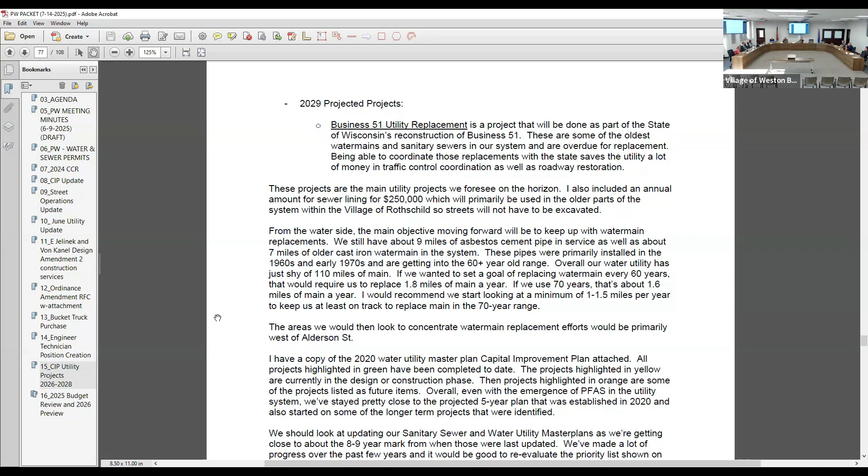In these next couple pages, I tried to lay that out a little bit - when we look at a project, we look at the water, the sanitary, the stormwater, the drainage, the street itself, and then any other considerations, if there's a need for pedestrian ways or whatever other ancillary item there may be. So this Everest area has AC water main, and there are some pretty bad roads in that.

Oh, that one's just Everest Ave. Everest Ave itself also has some bad spots. It also has some spots that we recently overlaid.

So when we try to look at our street maintenance budget, we're trying to balance, you know, we've got a bad road, but how good of a fix do we want to make if we think that water main needs to be replaced in the next, say, 5 years?

For Shorey Avenue? Is it there someplace? So Shorey's part of the contract this year for repaving. From where to where? X to Anastasia. And then after Anastasia out to Zinzer, we have another maintenance contract with RC Pavers to do overlays in there. It doesn't look good, really.

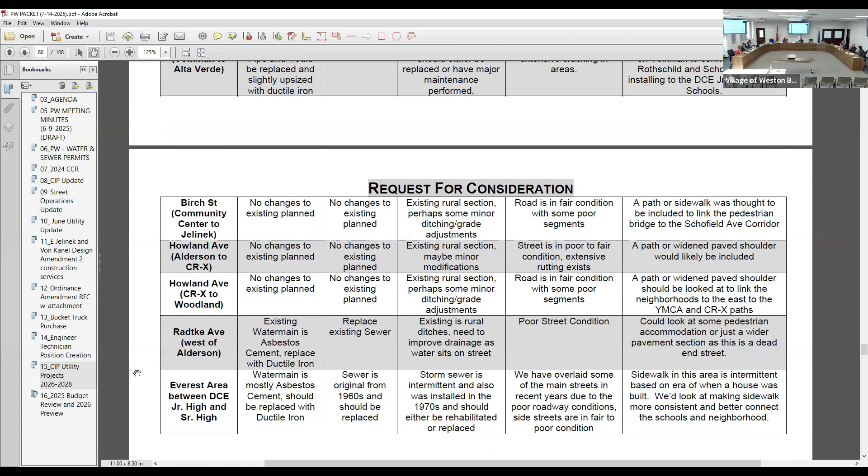No, it's bad. I mean, I'll bike in there, I drive in there, and comparing with the other roads, some of the roads we have in the village is just bad. And it's not the low traffic area either.

We can get into the operating budget kind of discussion too, is we only have so much money and we try to balance everything as best we can. And I guess it's really up to you guys is, are there items that we're prioritizing that maybe we shouldn't be, or there's other areas we should be prioritizing instead?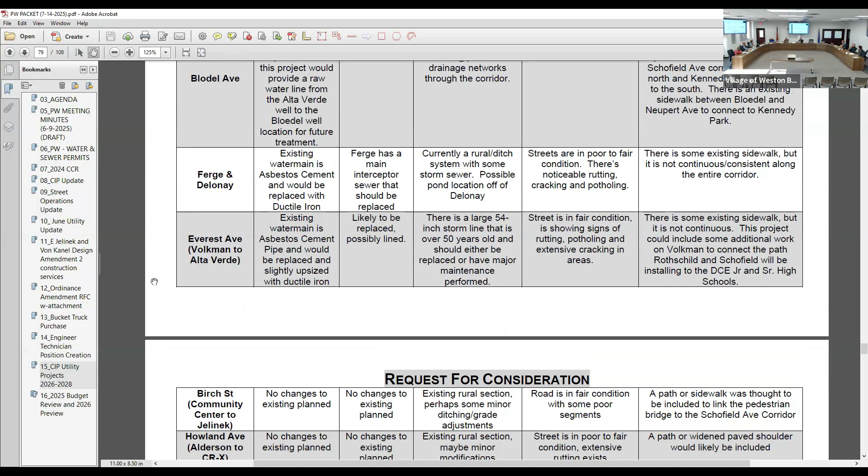You know, I was driving to the Shorey, and I think about that PASER project, PASER program. I said, that doesn't really work. I mean, how are you gonna rank that?

I mean, you drive the road, you take a look at the road, you can make a judgment, this has to be taken care of. And it is way overdue, because sometimes we rely on that program and we extend the life of the road, but it really doesn't look good.

So I can tell you, we do rate our roads, but I don't necessarily use PASER to determine everything either. Because it doesn't tell the story, let's put it that way.

No, I mean, it can tell you if it's a good road or a bad road, based on a numerical rating, but sometimes the hard part is you can have a really good road that then has a 200-foot section that's bad. And you go, well, do we try to just call out that 200-foot section, or do we average it out along the whole roadway? So, you're gonna be taking care of it this year?

Shorey will be taken care of before winter, yes. We're, the initial portion of it, we're trying to coordinate with Weston Avenue, because we want another alternate route to get to Huron Street. So if Shorey's under paving for construction between X and Huron, we're kind of blocking people from getting east of Camp Phillips Road.

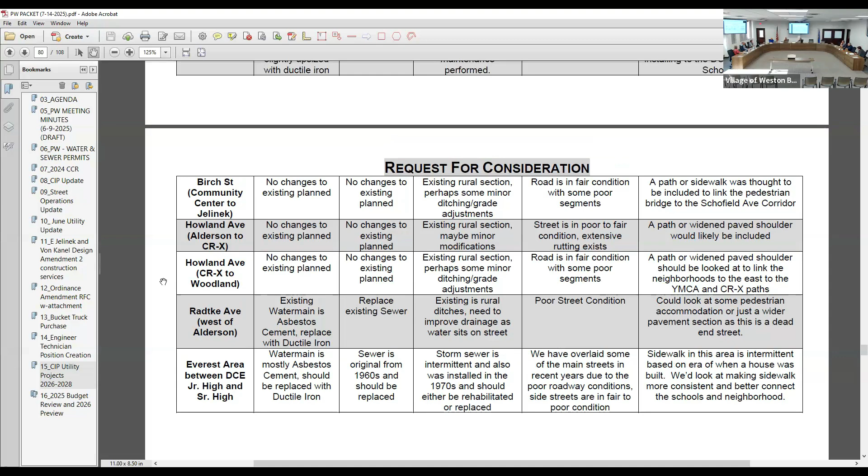Yeah, so I went through a bunch of these little smaller projects, maybe not smaller projects, but projects themselves. I'm trying to just lay out the purpose, and like I said, the Everest area in general is original underground infrastructure, generally from the mid to late 60s and early 70s. And there are some roads out there that are bad, that we'll keep trying to just piece together.

And again, sidewalk in that area is very intermittent. My understanding is if you had a VA loan back in the 60s, you were required to put a sidewalk in. So it wasn't necessarily a Weston thing, it was a mortgage or federal loan program item.

If you drive through there, there'll be two houses with sidewalk, a house without it, another house with it, and then a house without it. It's very intermittent back there. I'd try to at least look at making something a little more cohesive.

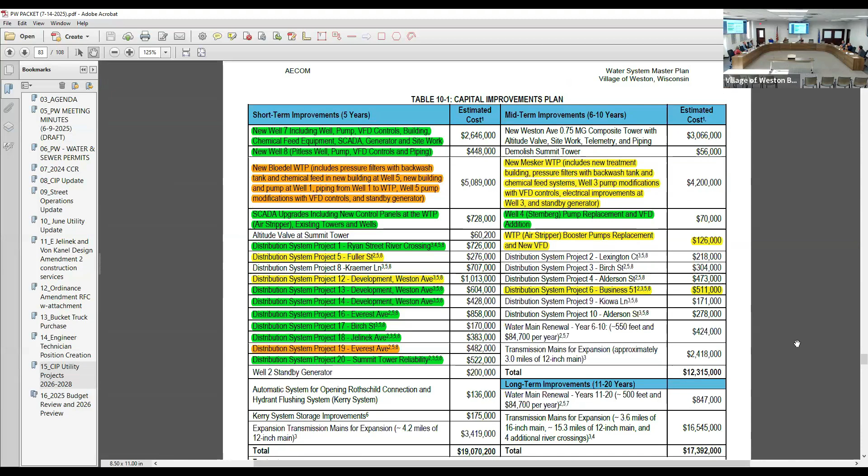I did want to highlight this 5-year plan from the water master plan we completed back in 2019. That first 5 years would have taken us through 2024.

Anything in green, we've accomplished, it's done. Anything in yellow is currently under design or construction. The orange is identified as a short-term need. For the most part, we've taken care of a lot of those big ticket items.

The wells 7 and 8, we had wells 1 and 5 and 3 and 4 kind of flip flop, so we're doing the work for the Mesker and Stemberg wells and bumping those ahead of the Bloedel Alta Verde wells.

Otherwise, a lot of those looping projects and the critical crossing at Ryan Street, that was another big project we accomplished, important for the redundancy and resiliency of the water system. So we now have two lines that cross the Eau Claire River instead of just one.

I just wanted to highlight that when we put these plans in place, we did a pretty good job following it, given the world of PFAS and COVID and everything else that hit right as we adopted that plan.

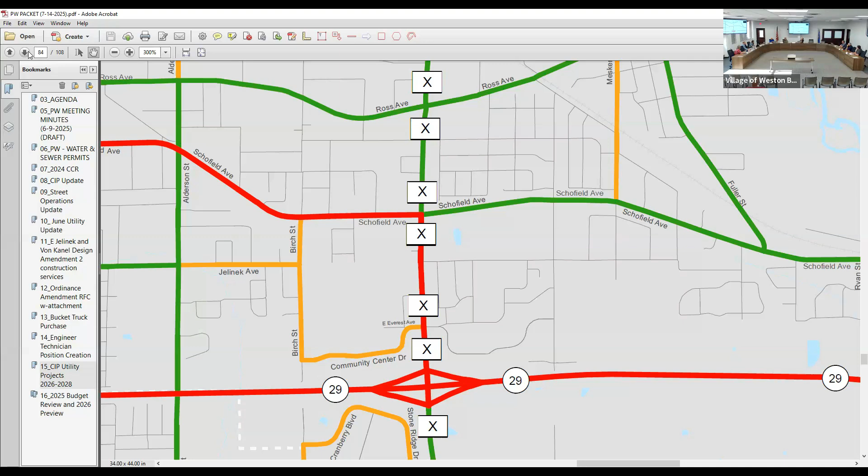So if you have any suggestions, thoughts, that's just more food for thought. We'll discuss next month as well.

So you talk about item 16 too, right? I didn't get into 16, but I can quick. I thought you brought it up. Go ahead, yeah. Well, they kind of intertwine.

Our capital improvement plan helps dictate the level of maintenance we want to perform on our streets. So I did include our 2025 budget, and it can lead into our 2026 discussion.

This is just the budget document itself for Public Works. You don't have to necessarily go through line by line. The big ticket item is really

this 236, our street maintenance, our surface maintenance. Our 2025 adopted budget there is $550,000, which is our crack sealing, our GSB, our concrete repairs, any of those items. So that's the big number we use for street maintenance.

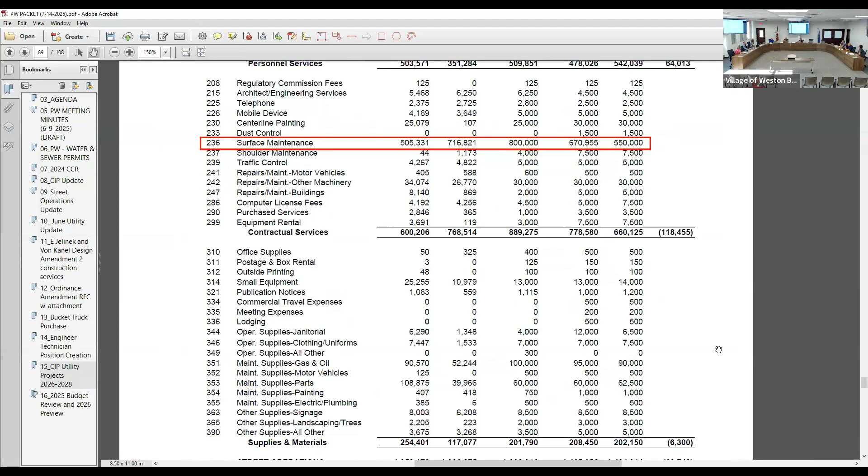So I'll just skip to the rest of this. As we talk about our budget, we currently have a little over 119 centerline miles of roads and 50+ pieces of equipment.

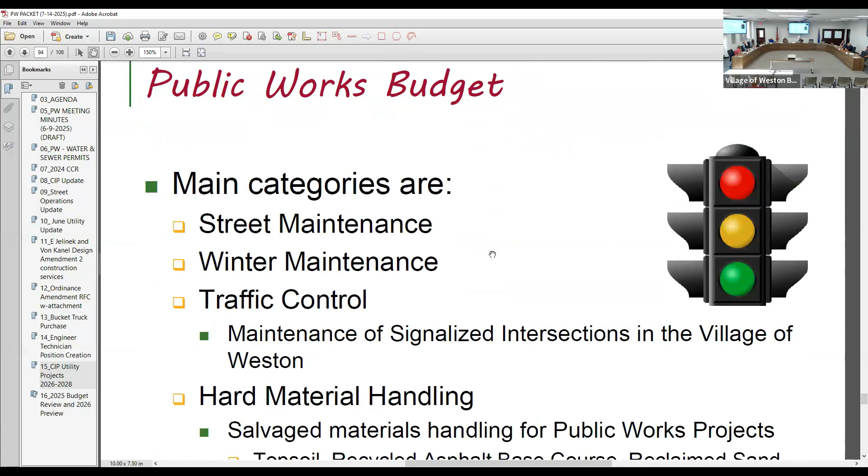I'll try to keep this focused on the general fund. We'll get into the utilities again later. The Public Works budget is really street maintenance, winter maintenance, and traffic control. Street lighting is another big one.

Our operations budget, over the last 5 years, has changed a little but not drastically—essentially about $2.1 million to this past year being $2.24 million. In general, this is 90+% of those three budgets. The summer street operations, winter maintenance, and street lighting make up 93% of the budget.

Is there any grant for these projects? Grants are outside of any of this—this is really just our routine. We need to plow streets, we need to crack seal. This isn't necessarily projects as much as it is our routine day-to-day, Monday through Friday work—well, weekends for plowing.

How many miles of road have we added in the last 10 years? Maybe 2, maybe not even. Hinter Springs, the Green Tree Acres coming up, will be some miles. We'll have a little bit of the Arrowhead Estates. But yeah, we haven't added a whole lot of miles—I mean, we added some subdivisions.

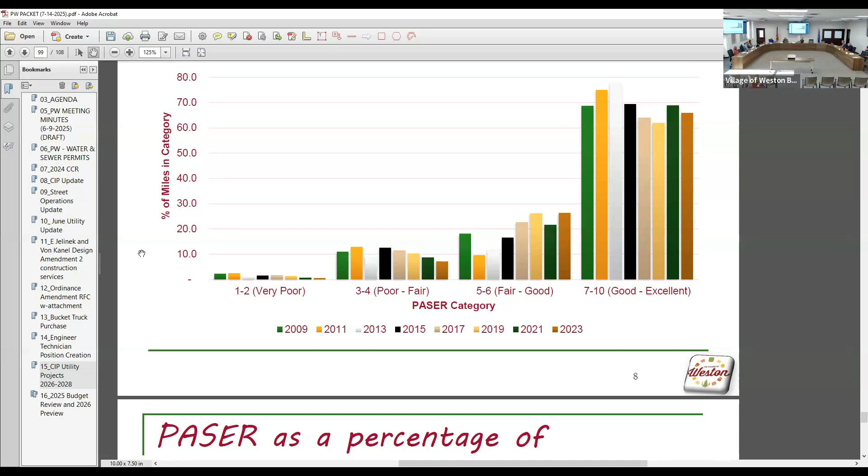They do add up, and that's kind of when the village really had its big boom, right around the turn of the century, around 2000, when the business park got built, the hospital area was built, the Sandy Meadow subdivision got built. We added almost, I think, 40+ miles of roadway in less than a 10-year span. So the village really grew during that time.

Because that's really what's going to ultimately drive that budget—how many miles are we adding? That's why I was curious how many we've added. Yeah, and we try to keep...

I always bring this one up: the GSB sealant is a little under $1 a square yard. Chip seals are about $2.30, overlays are $9, a repaving project where we mill off and repave is about $28, and full street reconstruction—replacing the base and all that—is about $85.

So we want to do as much as we can on the low end so that we're treating as many miles as we possibly can. That's where the struggle sometimes comes in—residents saying, why are you just repaving that road, and now 3 years later you're going back and spraying it, and you haven't touched my road in 20 years.

What's going on? This is really what we're trying to do—we know we have to get to your road, but your road's costing 20 times more than what it takes to maintain that other road. We want to make sure we maintain that new road as best as we can so that 50 years from now we're not worrying about these projects because they aren't needed, in theory.

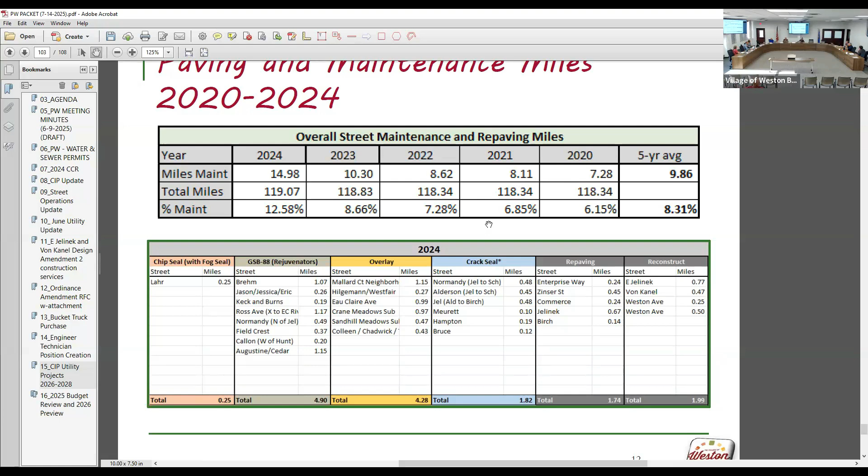So here's our 5-year average of repaving. In 2020 we had 118.3 miles. Now we're at 119, so we added 0.7 miles. But this past year, 2024, we were at about 15 miles of maintenance. Previously we were down around 7 to 8. So as we get these new pavements, we're able to put lower cost treatments on them and keep up, which is kind of the goal moving forward.

And then this is the other fun part, our transportation aids. We peaked in 2011 at 1.248 million in transportation aids. In 2025 we're at 844. We're going to hit, I think, 956 this coming year. So we're moving upwards again in the right direction.

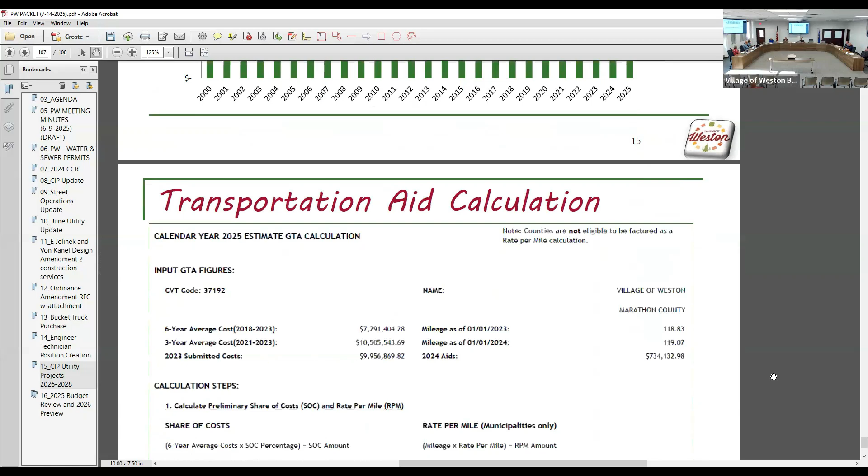But we took a big dip in that 2010s, early 2020s timeframe. As we had new roads, we stopped doing some things, and when you stop spending money or stop maintaining, the state then says you don't need your money anymore, so they no longer allocate it. That's really the trick, right? You've got to spend a certain threshold to get the money in the future. Correct. So hopefully in about 2-3 years we're back to where we were in 2011 with our funding levels. So I just wanted to review that and reiterate where we're at and the thought process behind what we do and why we do it.

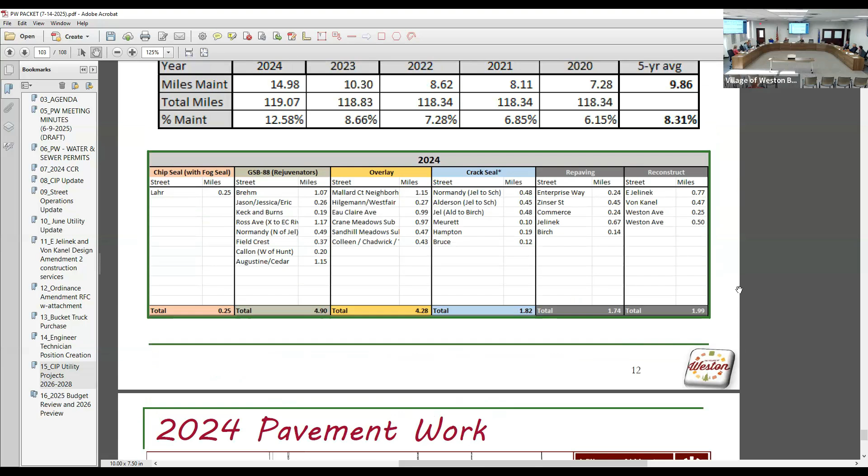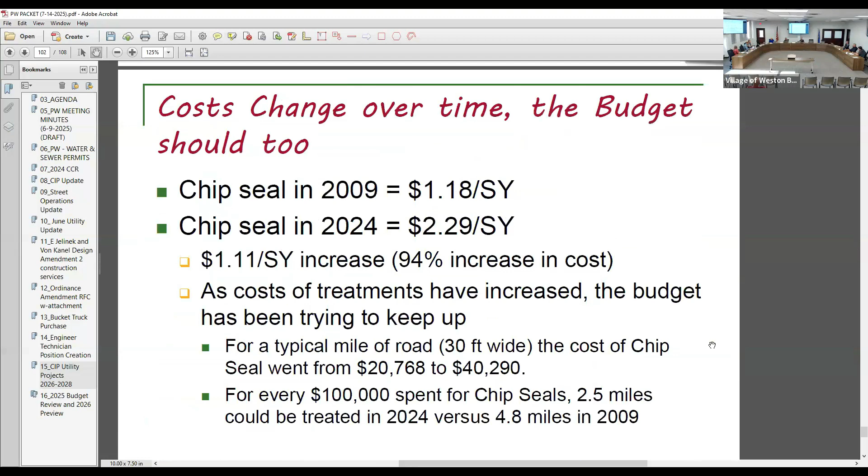How big of a hole is that bridge going to cause in the road maintenance? That would end up being a capital project when we go to redo that. When the day comes where we say we need to redeck this thing, that's a true capital project. The $9,000 is just making sure we keep that cap sealed — that's a maintenance expense. But when it's all of a sudden a million dollars plus for redecking replacement, then it becomes a capital expense. There's some assistance for bridge funding, bridge aid, but the tricky part is once you're in it, you're always in it. It can reduce your cost for the year you need it, but then every year after you're paying into it. Kind of like the culvert aid the county has too — you pay into the culvert aid project, but the years you don't need it, you're still paying into the fund.

There's a little bit of a risk reward.

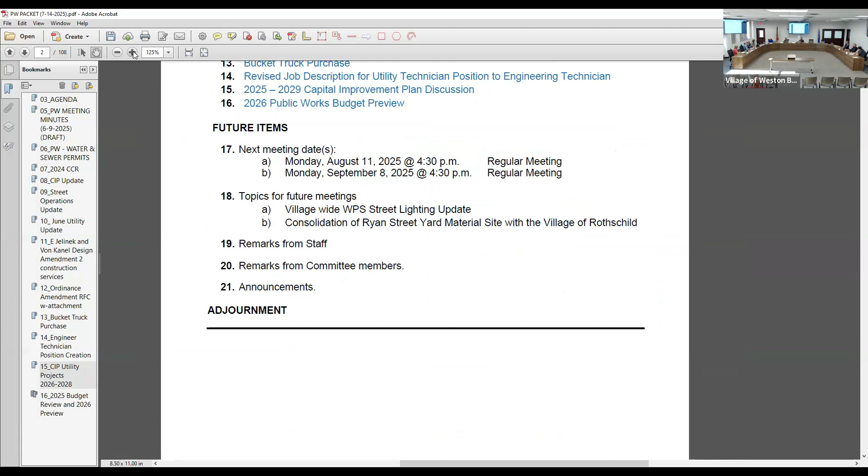I will not be attending that. The September 8th? Correct. Okay, Germany, where are you going? Germany. Sure, last year you went to Italy, didn't you? Last year was Greece. Staying with the G theme.